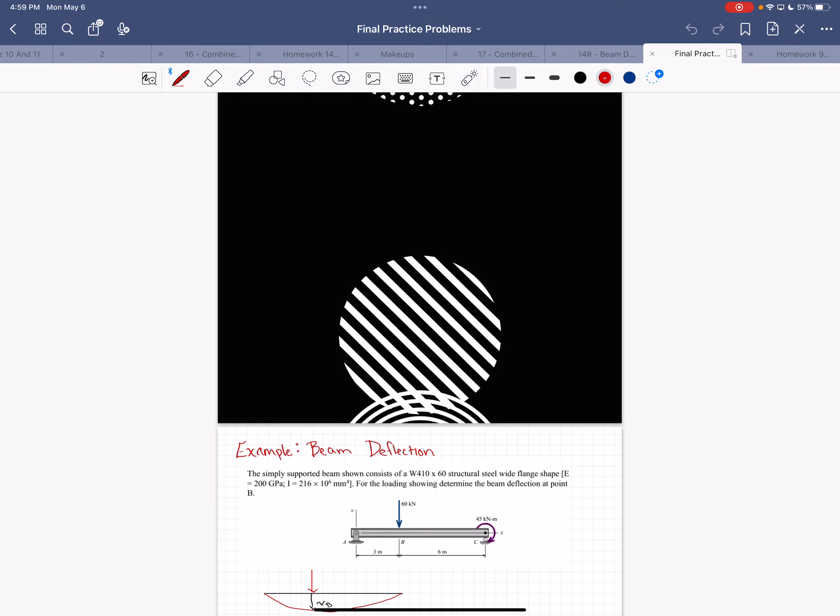Do you guys want to do a beam deflection or indeterminate problem? Do you think we should? I think we should do one of them, whatever one you really want that we should do. I kind of feel like we should do this one, whatever looks exactly like the questions on the test, the most similar to the test.

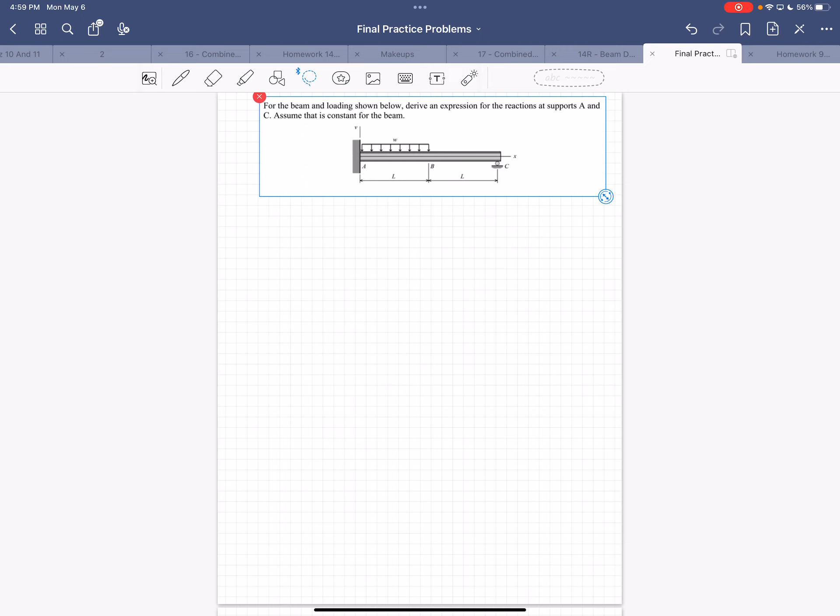We'll do this. Okay, I brought tables, do you guys want tables? Yeah, okay. I printed out so many, look at this stack of tables. So you have to return them tonight. Feel free to come get tables and we'll do this problem. Grab one, we can all share it, we can all point and be friendly.

You want tables? There's both styles, yeah. You can spread them out a different way if you want. Cool. You took it too? Yeah. You just took it to get a better grade, you're not going to be... probably not. Could you, if I get 100%? Maybe, I might, there's two different kinds. Sometimes one is better and sometimes the other one's better.

A 90 exactly, oh yeah. Oh there, I see, that's one style, and the other style, this one's just one page. The other style is more pages. Alright, nice.

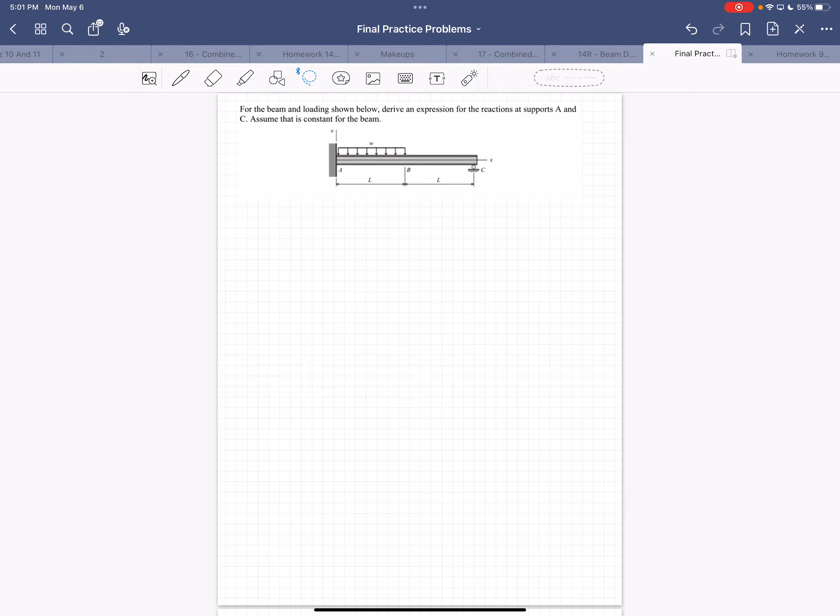At this rate, we're definitely here until 7. Alright, okay, ready?

How many reactions does this beam have? I am, thank you so much for reminding me, I am recording, and my microphone was off but I turned it on. So hopefully all is good. Okay, so how many reactions?

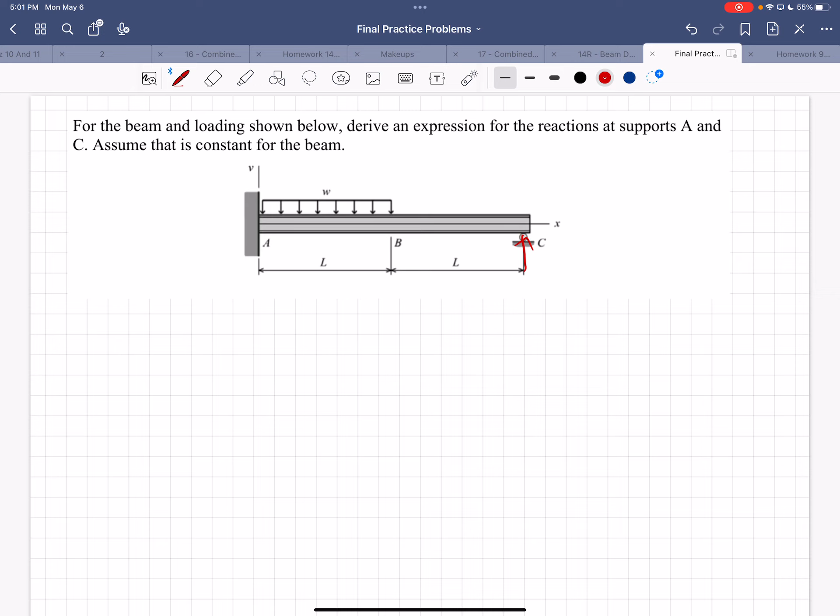4. Technically 4, 3. How many equations do we have? 3. So it's indeterminate, right? Ultimately we have CY, we have AY, we have a moment at A, and then we could have AX, and we would only have sum of the forces in the y, sum of the forces in the x, and sum of the moments about one point. 3 equations, so it's indeterminate to the first degree, right?

So what do I do? Yeah, get rid of one of the supports. Nice, and get rid of one that makes it easy. So let's pretend this was simply supported, just for a minute, this is a simply supported beam with a support right there. Get rid of that support, right? Because if you get rid of that support, then it's just a simply supported beam, right?

So many people, we're doing an indeterminate problem. There's tables if you want tables. Okay, but it's not really that, but I just recommend you do that if you were given that problem.

For this one, what is the go-to support to remove? C, yes. You could technically remove the moment at A, but I think that's harder. So you could remove the moment and turn it simply supported, but I think it's better to remove C. So then we're going to have two systems, right? So we remove the redundant support.

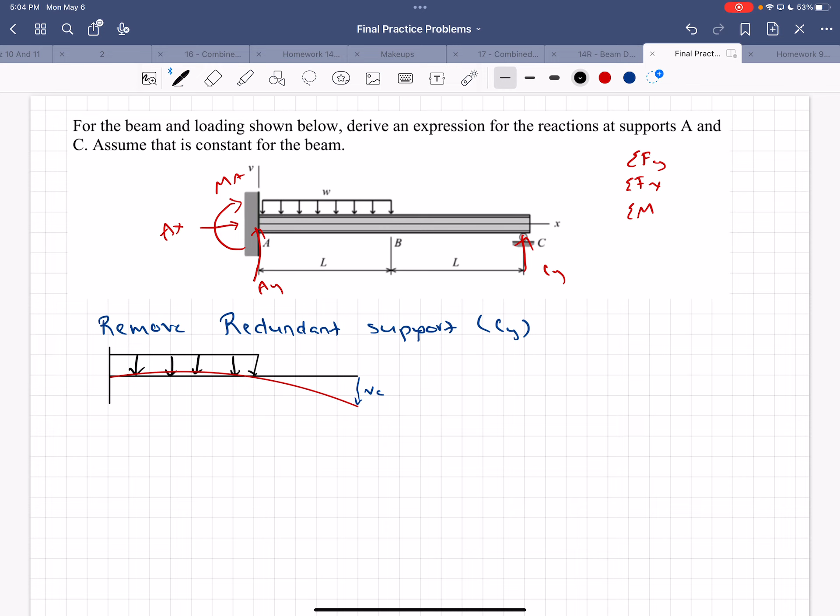So then the next thing you do is you draw another picture of what kind of beam is this? What do we call this beam? It's a cantilevered beam. That's just fun fact. So we draw another picture of a cantilever beam.

Do I put that distributed load on this picture? No. What's the only thing I put on this picture? CY, right? And it's going to be a point load where we removed the support, right? So CY will go up.

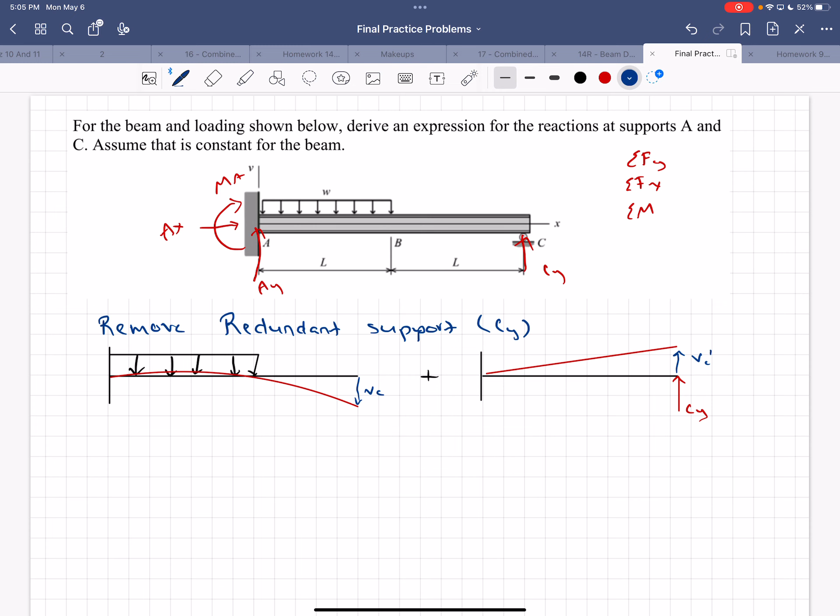So then how would this beam deflect? It would go up, right? Well, it would be curved, but whatever. So then this would be VC prime. But is there actually deflection at C? No. So we add VC plus VC prime equals 0, okay?

So if you do that much, you'll get a lot of points. But the next thing you have to do is go to the tables. And for this problem, neither table is superior. They're both equally good, so you can just pick whichever one you want. Anyway, sometimes they're better, but we're not going to get into that.

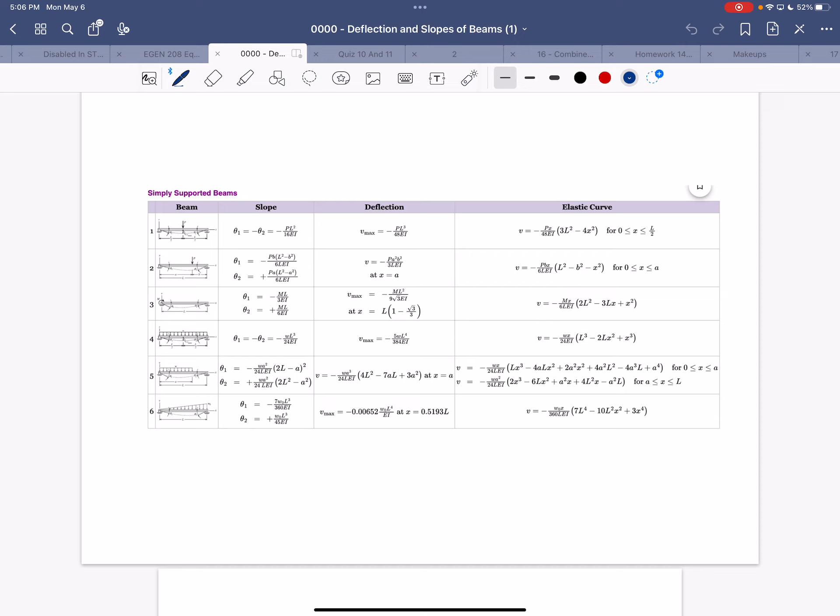Okay, so go to the table. What tables do you guys like? I have tables. Do you like the 2-page tables? 2-page tables? All right, do they... Let me see. I'm going to see if it's perfect. Yeah, I'll go with that. Nope, I won't go with that.

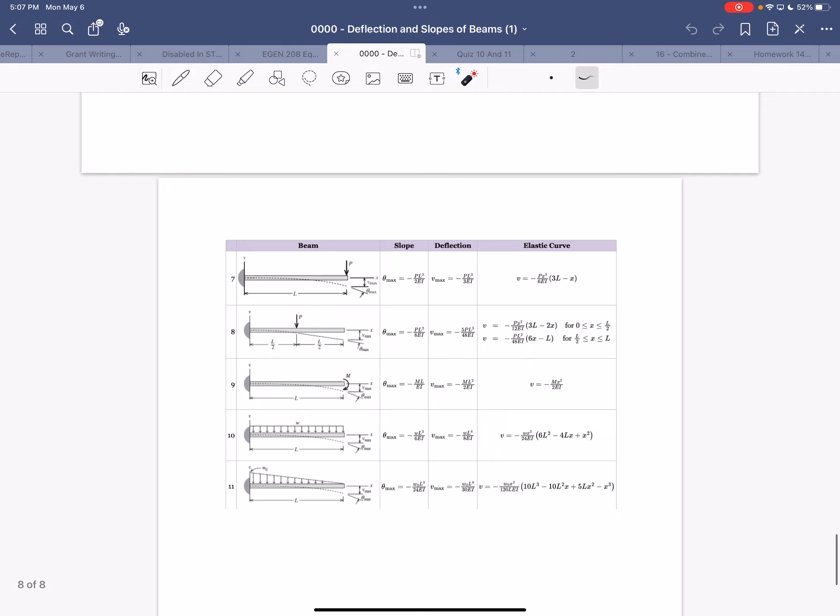So grab both and, I don't know. Does that make sense? So we don't want to do that because we would have to calculate the slope, everything. I'm lazy, and I know these tables really well, so I'm going to do this. All right, so because this table, see how this one has a distributed load over part of the beam. Cool? That's why we're going with this one.

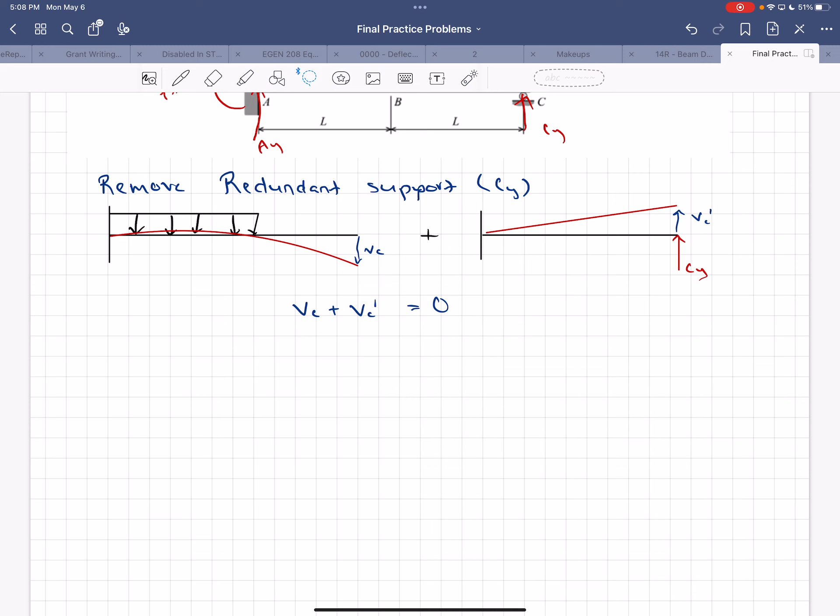But it's not always the better choice. For here it is. So, all right, there's just way too many things open. Okay, this is what we're doing. Okay, so we're gonna put that here. Okay, does everybody have that table?

So, this is something pointed out. So, we're lucky, right? Like our picture matches this picture exactly, right? However, if it didn't, you can flip things around and stuff like that, but that just comes with practice. So for this one, we're lucky, but you have to watch that and watch these rules and stuff. Then there's the rules, so you do have to pay attention.

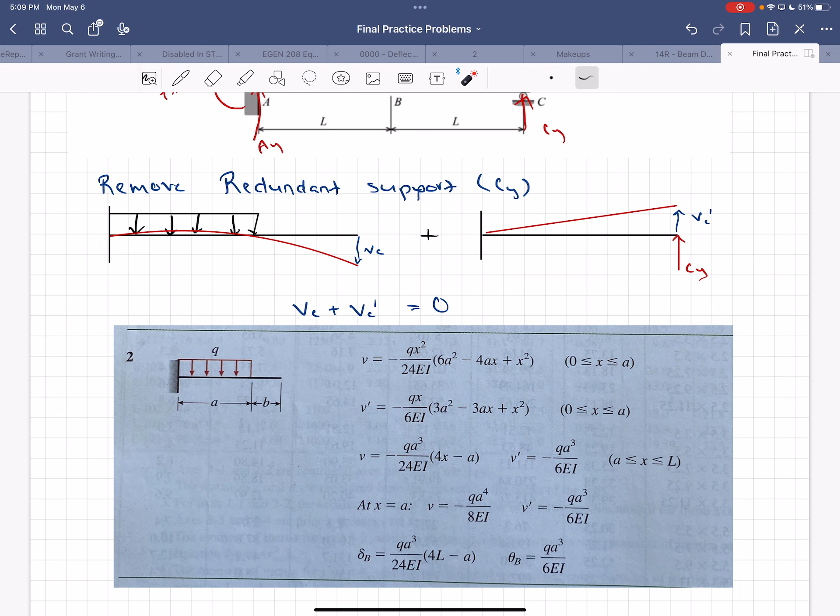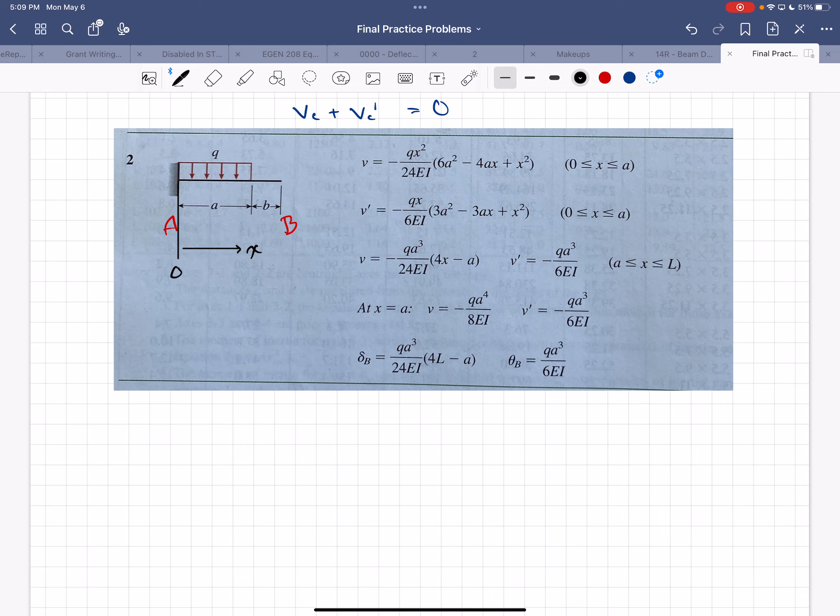It's not just like grab and go. Okay, but if you pick a table, okay, so where are we calculating the deflection? At the, yeah, way at the end of the beam, right? So technically they call this big A and they call this big B. Okay, so what would our X equal if X starts here? Remember, X always is 0 at A. It's 0 here, and X gets bigger as you go across, okay? But you could technically flip that around. So what would our X equal? L. L, right. Good job.

Perfect. So, can we use this equation? No, because that only works for X is less than A. Can we use this equation? That's slope. Remember, V primed equals slope. So you definitely don't want to use that equation. Can we use this equation right here? Yes. Can you go over why X equals L? Yes, so X is the place where we're taking the deflection. It cannot be stressed enough.

X is where we are calculating deflection. Does that make sense? We're calculating it all the way at the end. So X starts here at 0 and it's L over here.

Good question. Okay, so we could use this equation, but I guess it's the same, it's equally easy, right? So delta B is technically also the deflection, but same thing. We're actually going to use this one so we can practice what to do. Why wouldn't we use the equation right below it? Right below it, that's when X equals A. So that would be finding the deflection right here, and we don't care what the deflection is right there. Does that make sense? Yeah. So it's reading all these little details.

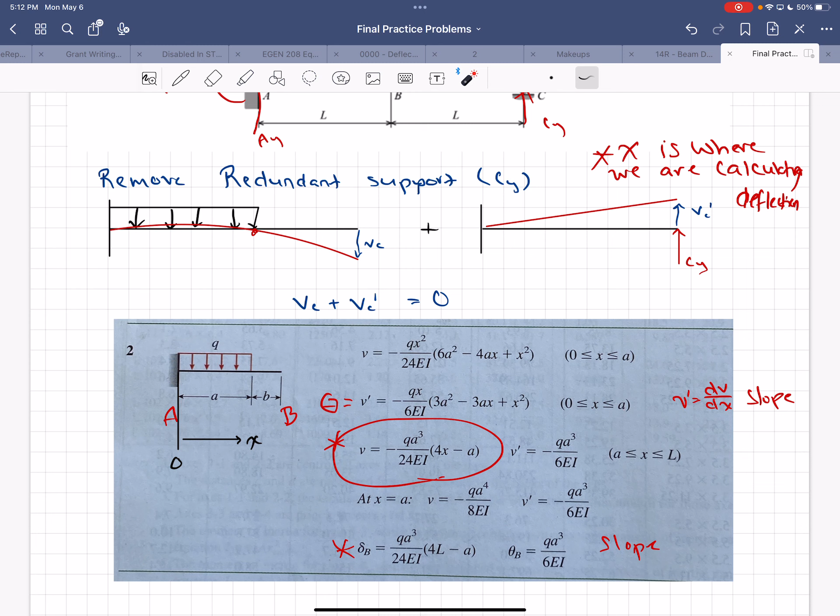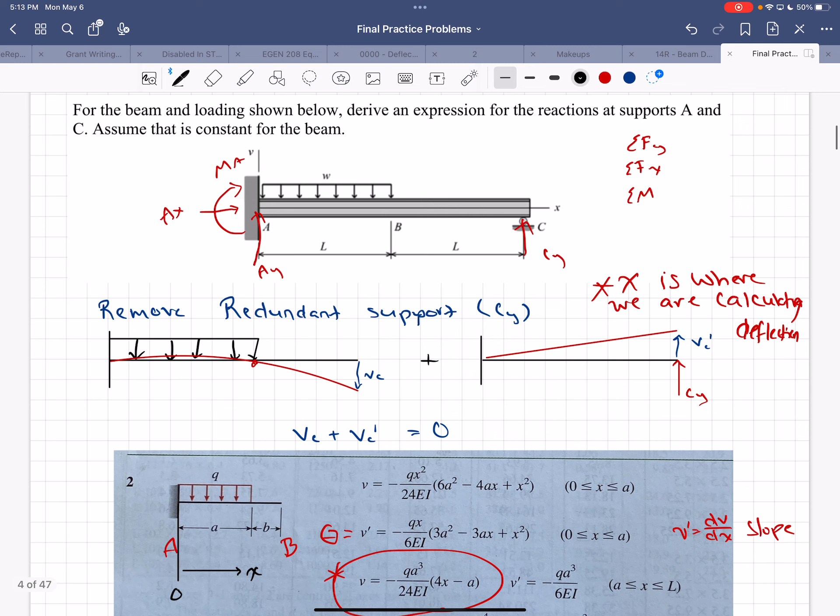Good questions. All right, the thing I recommend you do is write what all the variables equal. So Q equals what? W. Oh, you guys like this - it's no numbers, it's so much better, I think, someday. Oh, so much better. Q equals W. Okay, what is A equal to? L. Oh, you guys really love ones like this. A equals L. And X equals what? 2L.

Nice. Okay. So then V is going to equal negative W times L cubed, all over 24 EI, times 4 - use parentheses here - times 2L. Especially if it was squared, then remember the 2 is also squared. This one's not squared, but that's a thing, minus A, which is L. I can't stress enough, write this stuff down. You'll get points for it, and it'll just make your life a lot easier, because it's easy to mess up this stuff, but if I know you know what you're doing and you just messed up, you get more points, okay? So that's good to know.

All right, so now this is the part you guys don't like, simplifying it, I think, right? All of it. Yeah. WL cubed over 24 EI, times - that's 8L minus L, so 7L. So then it's just 7WL to the 4th divided by 24 EI. Did I get it right? Is that negative? Yep, it's negative. Good job. All right, I did get it right.

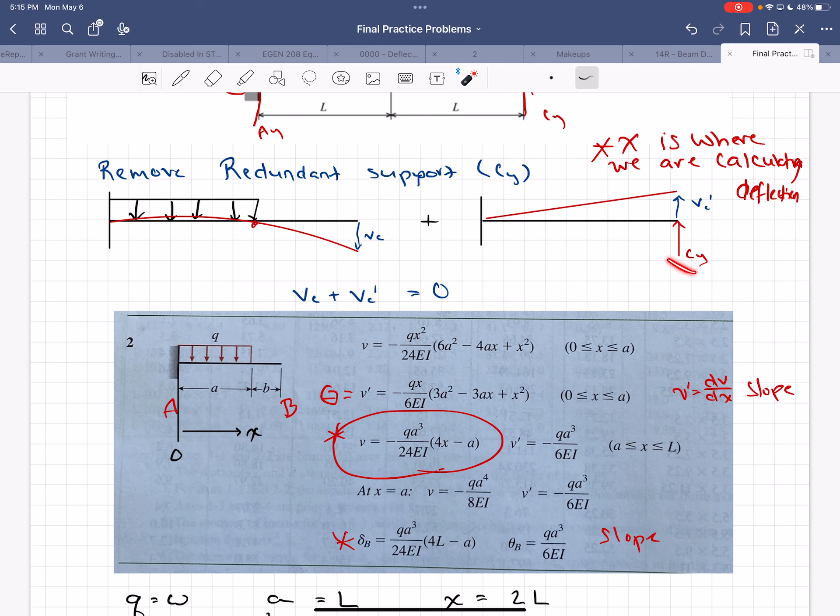Okay, so that's our V. Now we need our V prime, right? So that's from the point load, okay? No load on there except for the point load. All right, so we go shopping for equations again.

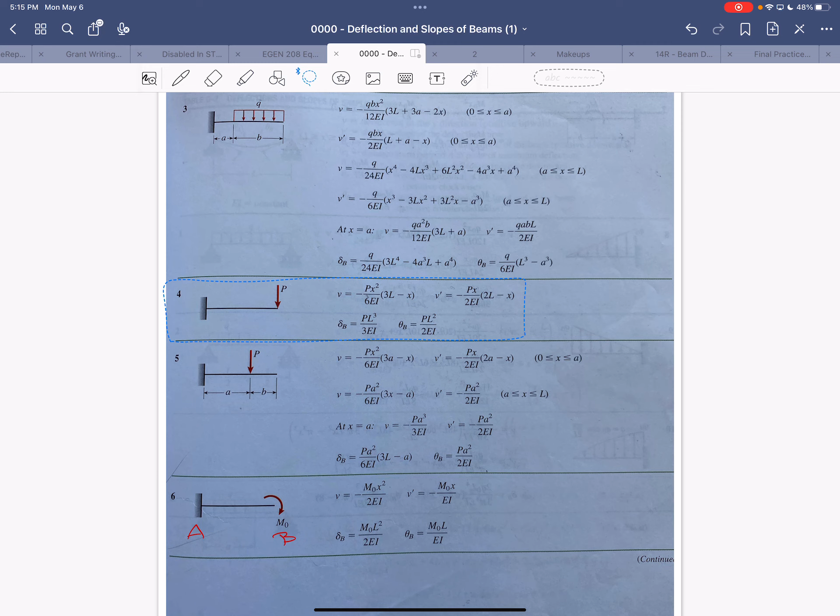All right, did you find it? For CY. Yeah. Okay. So then we have this. Okay.

So here we have two options. You guys see the two options? Which one? V? There's an easier option. Okay, but V is good, so you can definitely go with V. If you go with V, what's X going to equal? 2L, and then that would be squared. What's L going to equal? It's going to equal 2L. X is going to equal 2L. Remember what I said this one means?

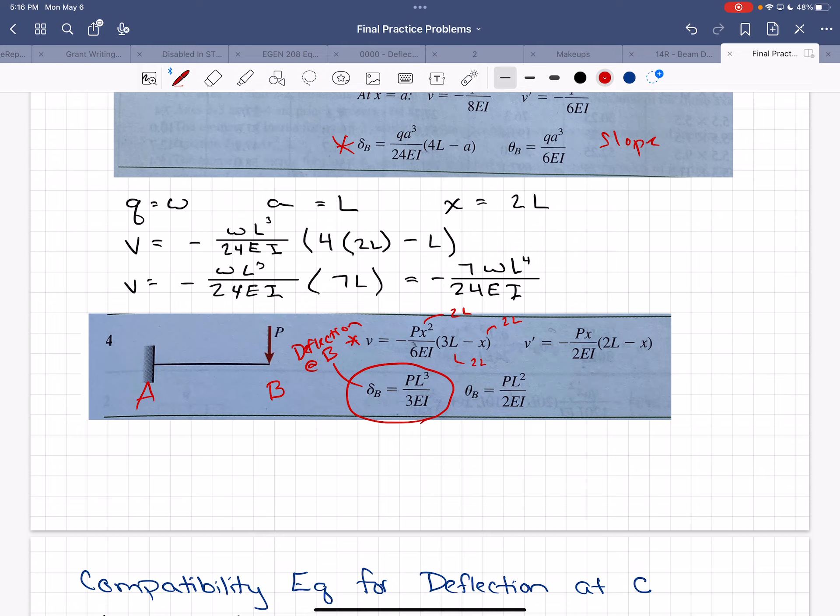So remember, yeah, they always call this A and they call this B. So this is the deflection at B. Is that where we want our deflection? Yeah. Yes, if you were to use that, just the B equation, that'd be totally fine. Would you just not use the negative? Right. Yep, we're going to make it positive because we know it's going to go up. Good job. Okay, does everyone see why? But you wouldn't be wrong if you used this one. You can totally do that, it's just a lot more work. Do you want me to do that? Or, okay, good - I really didn't want to do that.

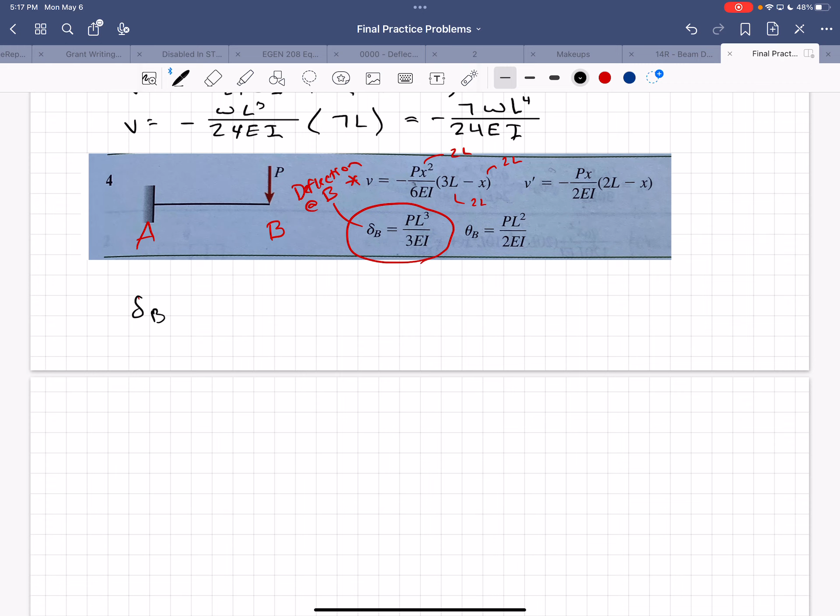Okay, thank God. All right, so this one's going to be delta B, but it makes sense why I can use that, right? Cool. Okay, that's the key - if we were calculating the deflection anywhere else, we couldn't use it. Okay, delta B equals P equals what?

P equals CY and L equals 2L, my favorite. So then we plug that in. We have 2L cubed over 3EI. So that equals 8 times CY times L cubed over 3EI.

Okay, so now what do I do? You can add them, set them equal to each other, and solve, right?

So, I see what's going on as I'm writing. This is updating. It's very confusing. Okay, let's do it the proper way.

We have negative 7 WL to the 4th divided by 24 EI plus 8 CYL cubed all over 3 EI equals 0.

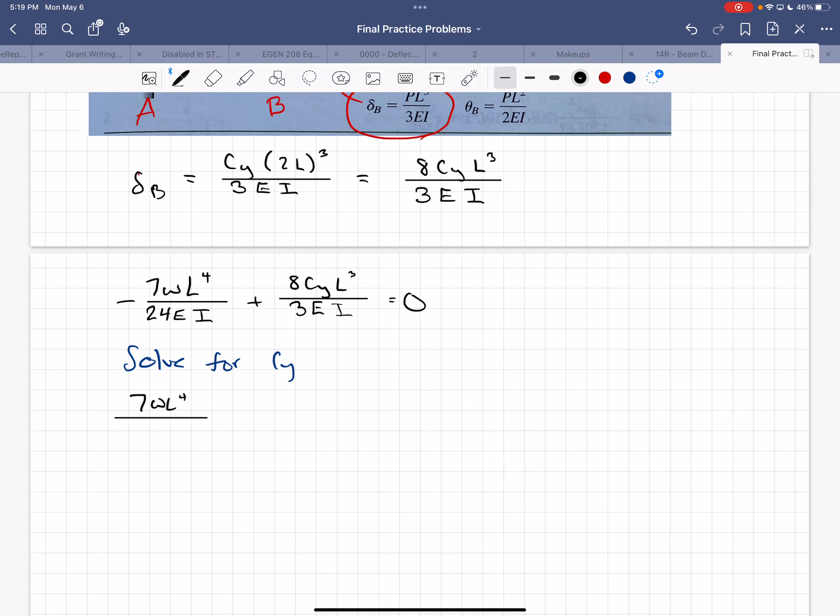And we solve for CY. So you end up with 7 WL to the 4th all over 24 EI equals 8 CYL cubed all over 3 EI.

Okay, how comfortable are you with then? So then you have EIs in both denominators, right? So you can get rid of those. Because you would multiply this one by EI.

I'll do this in colors. So you would have EI times EI. Is that better? Demonstrating? Okay. Then you would bring in a different color, you would divide by L cubed, and you would divide by L cubed. So now that goes away, and that goes away, and this goes away.

Yeah, you can do it however you want. And then the 4 turns into just a 1. And then you're left with CY equals 7 WL over 24 times 3 over 8.

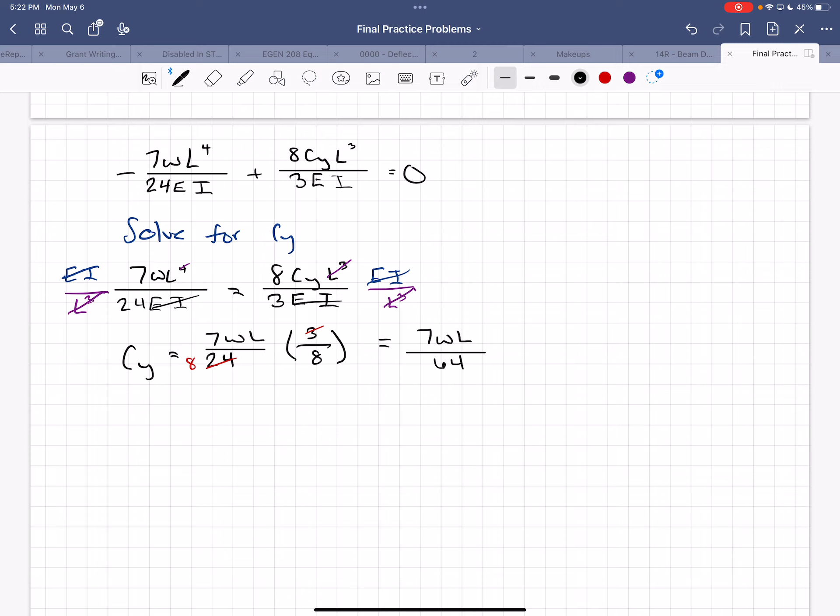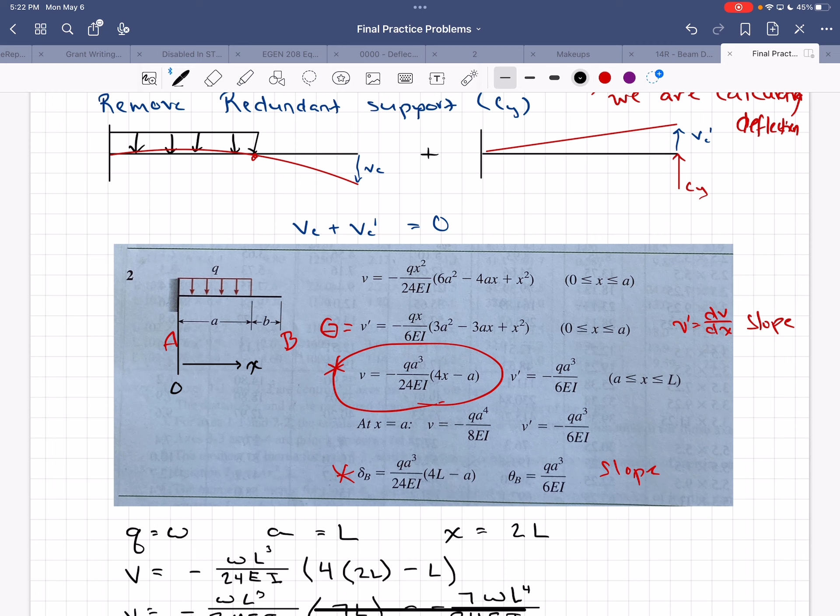But it'll be okay. 7.5 points, you got this. Use the tables, 7.5 points for the deflection problem. So that's like more than a quiz? 10%? Less than a quiz. A quiz is 10 points.

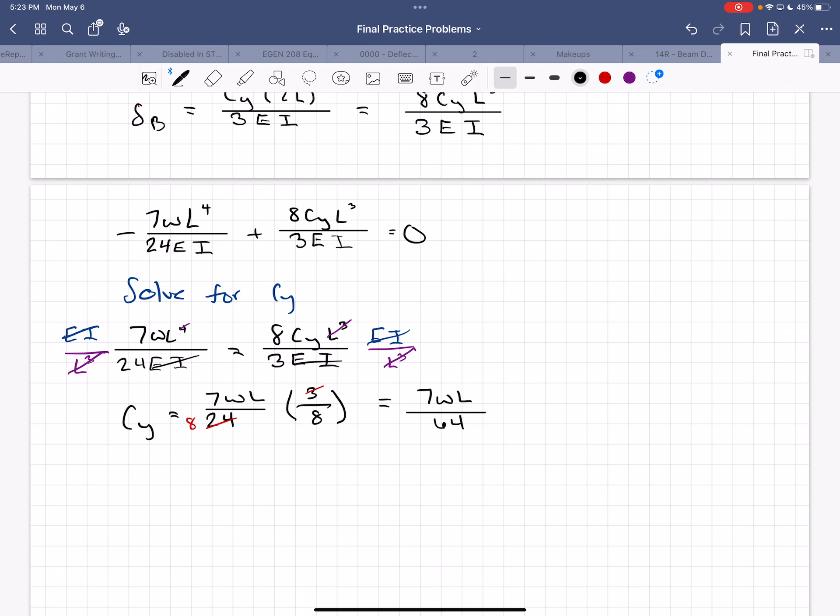Okay, yeah. How many questions? So this is for 7.5 points. How much is pressure worth? Another 7.5 points. So I don't have any pressure problems on here, but don't forget to study pressure, okay?

And mainly that's like knowing your way around your equation sheet, right? It's just going various up and down. And does everyone have an equation sheet? I brought extra. While you're studying for this, I have extra, so either get them now or on your way out, and I'll try to print more if you take them all.

But use the equation sheet while you're studying, and put stars on when we get to it. The things, they're right there. Put a star, okay, so don't forget about pressure, right? But that's like going up and down the pressure equation section. You have 3 homework problems. We did 3 examples in class, so you've got plenty of examples.

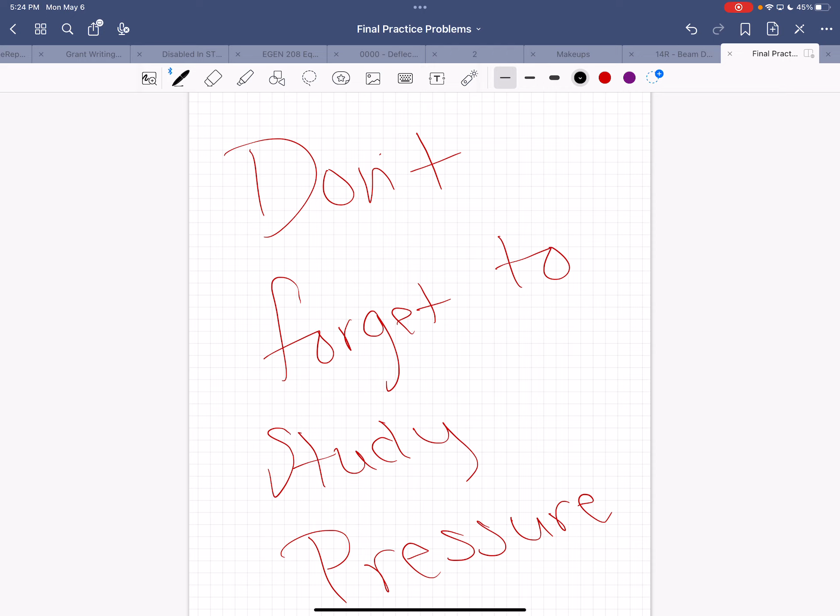So there's a beam problem that's 7.5. Some pressure problems at 7.5. So there's 2 7.5 point questions, a deflection or indeterminate problem, and a pressure problem, both worth 7.5.

Then there's a problem broken down into short answer questions. So you don't have to do a whole beam deflection problem, but you have to know how you would do parts of a beam deflection problem. That's worth 10 points. It's short, with a couple true/false questions and one Wiley quiz-style question. So that's 10 points.

Is that it? Nope, so that's 25, and then the last 25... 50 points total, yeah. I was confused. Then the last 20, I wrote it in lots of places. So then the last 25 points are general combined loading.

Okay, you got this. Do you want to do this problem or do you want to do general combined loading? Both. Okay, that's fine. So we'll do this problem.

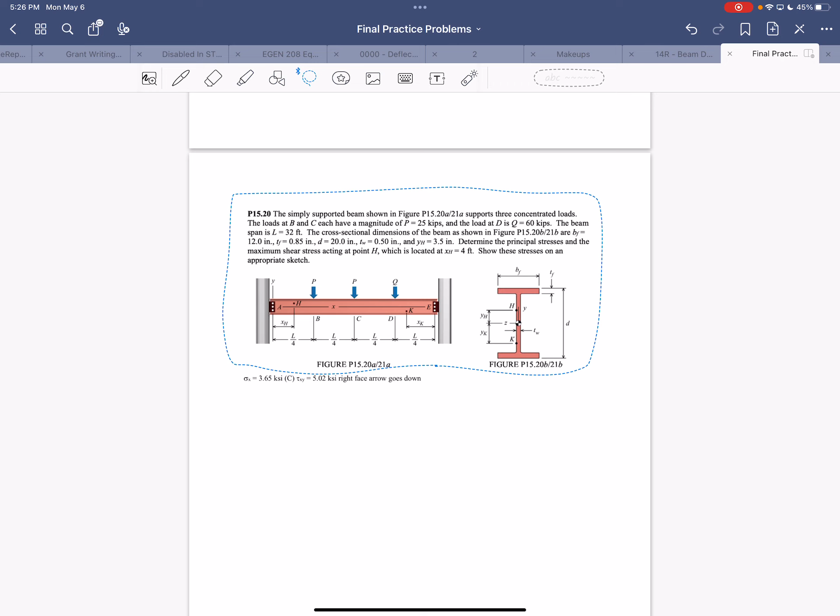That's not gonna work. Okay. All right. Oh, I guess I could have done that. Okay.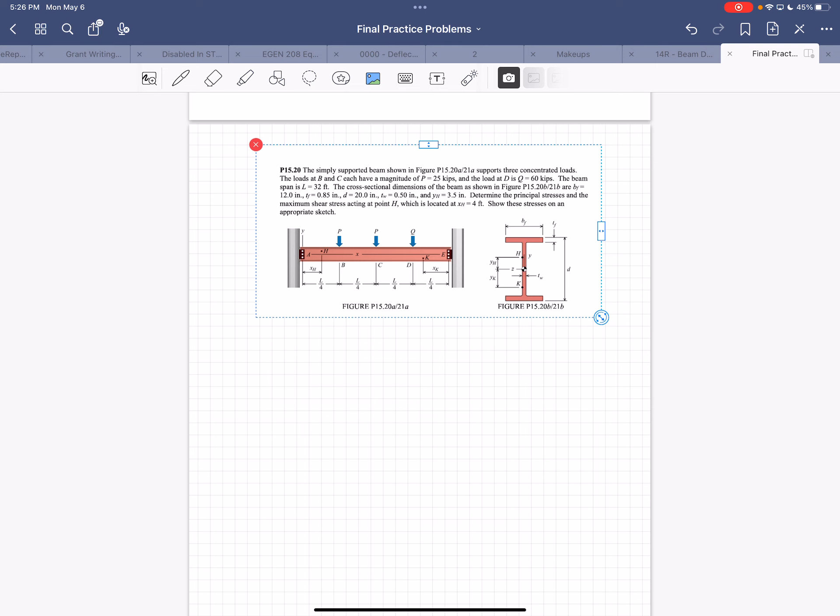Okay, so we're only gonna do H or K. How does that sound? But is H in tension or compression? I don't have my beam here. Compression, right?

So you have these loads, they're symmetrical, they're pushing down on this beam. This beam would smile, right? It'd be a smiling beam, a happy beam. So that means compression on the top and tension on the bottom, right?

So is K in tension or compression? Tension. Nice. Okay. I guess it's not symmetrical.

P equals 25 kips. That means this equals 25 kips. Q equals 60 kips. All right. And then we have a reaction at AY and a reaction at EY.

Do you guys feel comfortable solving for reactions? Cool, good. So you would sum the moments, you get AY, you'd sum the forces in the Y, you get EY.

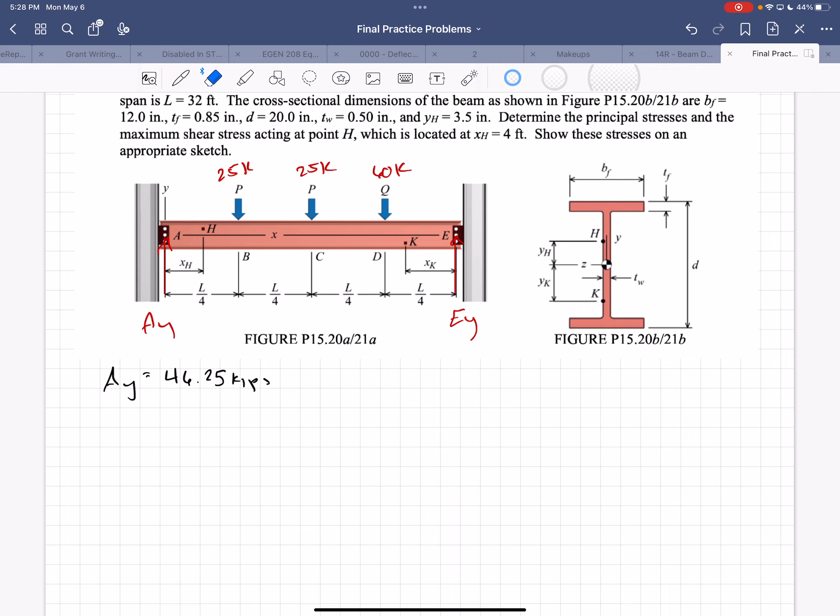Cutting it, right? So if we cut it, this is an important thing here: we're going to draw a free body diagram. And in this free body diagram, right on the edge, is H, okay?

And we have our reaction here of 46.25 kips. And then following the sign convention, right? So there's always the sign convention. This is what we call positive beam sign convention, where if we're looking at the right side, the shear is negative and the moment is positive.

And then remember on your homework, we also had an axial force, right? That was fun, it made a lot of you happy. And on the left side, we have V, M is negative, and we always draw the axial. But we don't have axial in this beam. Just to remind you, this is positive sign convention.

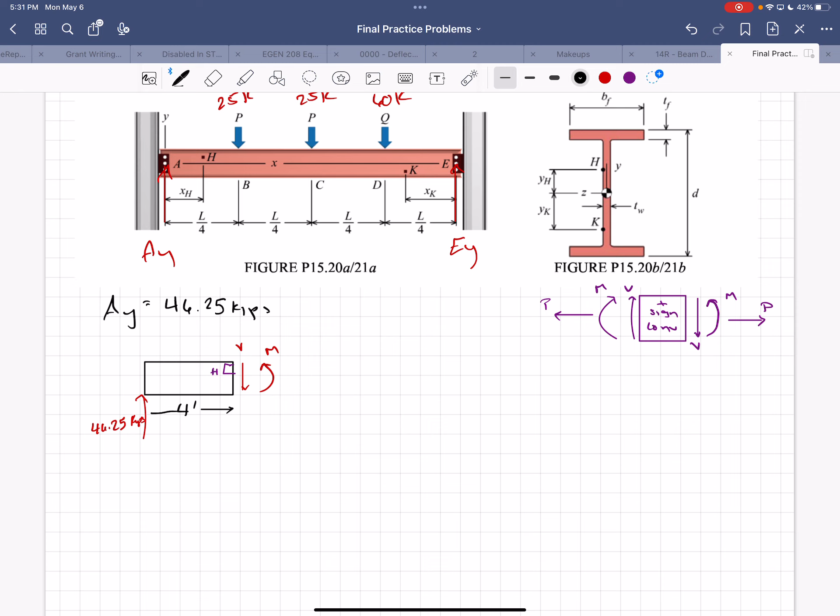Good question. And this distance is 4 feet, they told us that. So, technically, we didn't even read the problem.

We're not going to determine the principal stresses, because then we would have to do, what would we have to do to determine the principal stresses? Grind. We'd have to do Mohr's circle. So you don't have to do that.

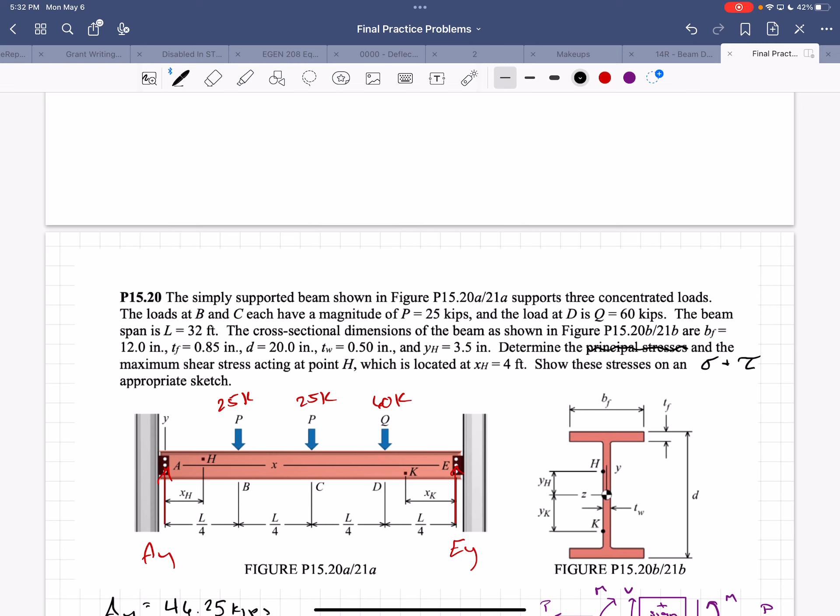We're just going to determine the normal and shear stresses at H. Is there going to be any Mohr's circle? No. No, that'd be a big curveball. All right, so we're gonna determine the normal and shear stresses.

All right, what are the equations for normal? What's the equation for beam bending? Sigma equals M*y over I. Nice.

No, what do you... how do you know when to use like the negative M*y over I? Anytime, so in beams, you can do it. So like here, you can do it. Don't do it for general combined loading because it's too hard to keep track. So the way it works is you can do it for beam bending because it's easy to tell if your moment is positive or negative, and it's easy to tell if your Y is above or below the neutral axis.

But with combined loading, there's so much going on that to keep track of whether each of those is positive or negative, it's just way better to look at it. So you can still put a negative sign there, but I think you're getting to the point where you can kind of see it. But if you can't see it, put the negative sign and follow all the rules. It's like a tool, but you have to know how to use the tool, and it doesn't work well for general combined loading. It doesn't work at all.

Okay, beam shear. What does that equal? It's not V over A. What is it? It's V times your favorite letter of the alphabet. V times big Q over I times the thickness, right?

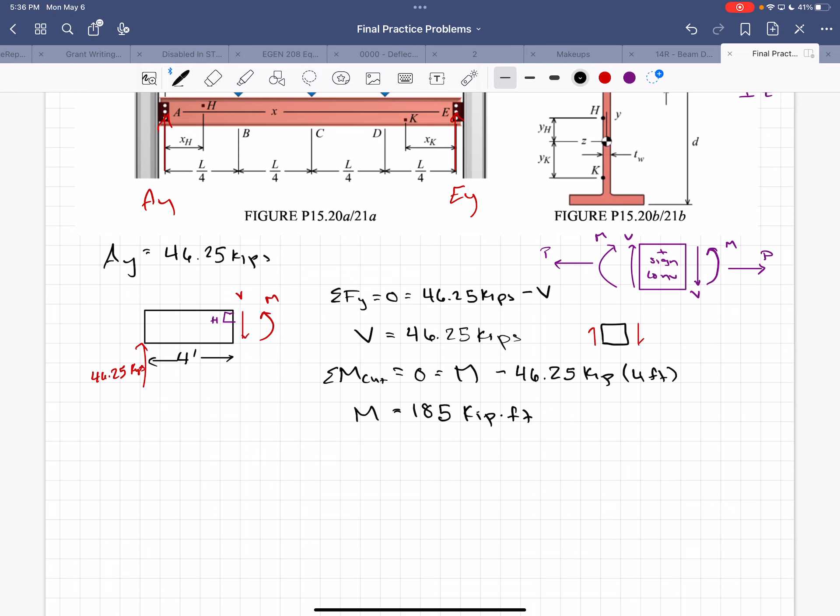Okay, then we're going to sum moments. I always sum them about the cut because that's just what I do. So then we have positive M. Remember, forces go away at the place you're summing moments, but moments don't go away ever in the moment equation, right? Okay, so we have M, and then 46.25 times 4, is that going to be positive or negative? Negative. Right-hand rule, summing about the cut, we'd have minus 46.25 kips times 4 feet. So the moment equals 185 kip feet.

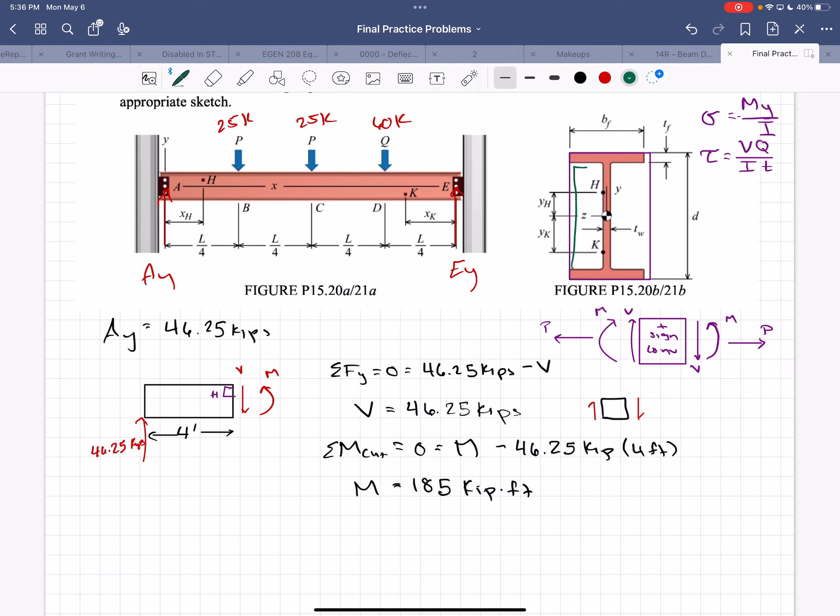Okay, then they didn't give us I, but because this is symmetric, there we go. Symmetric, we can do the purple area minus the green area, right? Okay, I'm not going to make you calculate I on the exam. Can I just write I? Is that okay? Yeah.

Okay, I'll do it. So this would be 12 times 20 cubed over 12, minus 12 minus 0.5, 20 minus 2 times 0.85, cubed, thanks for giving me, over 12. All right, 2,126.9 inches to the fourth.

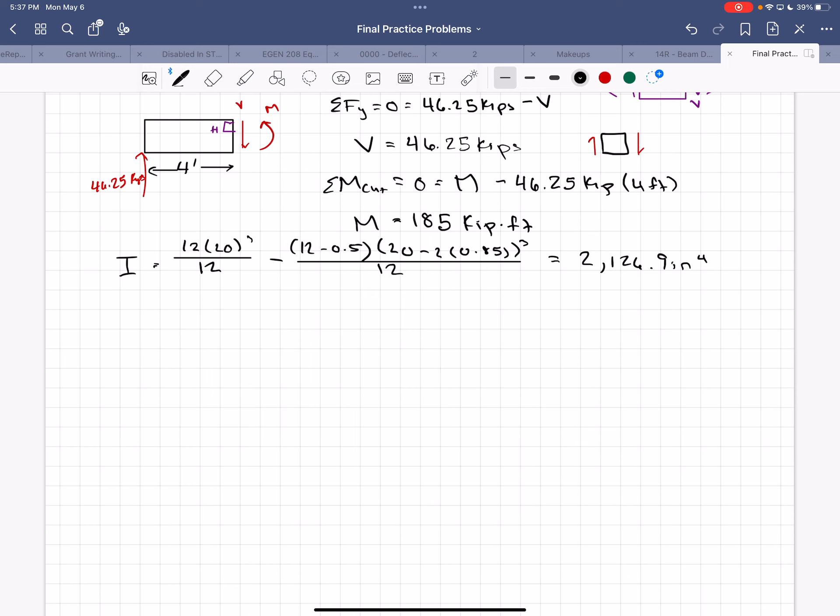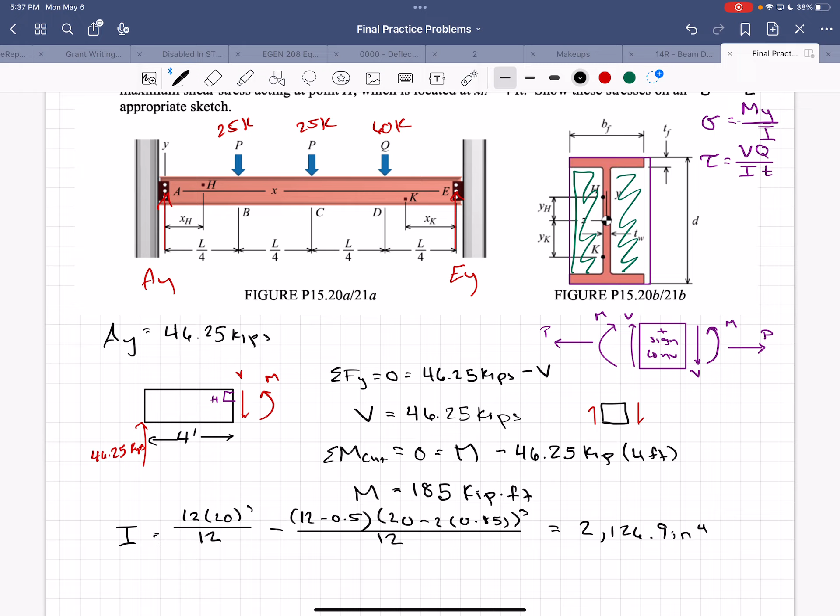Okay, so we can calculate something now, right? Which one can we calculate? Bending normal stress. So bending normal stress is sigma equals My over I.

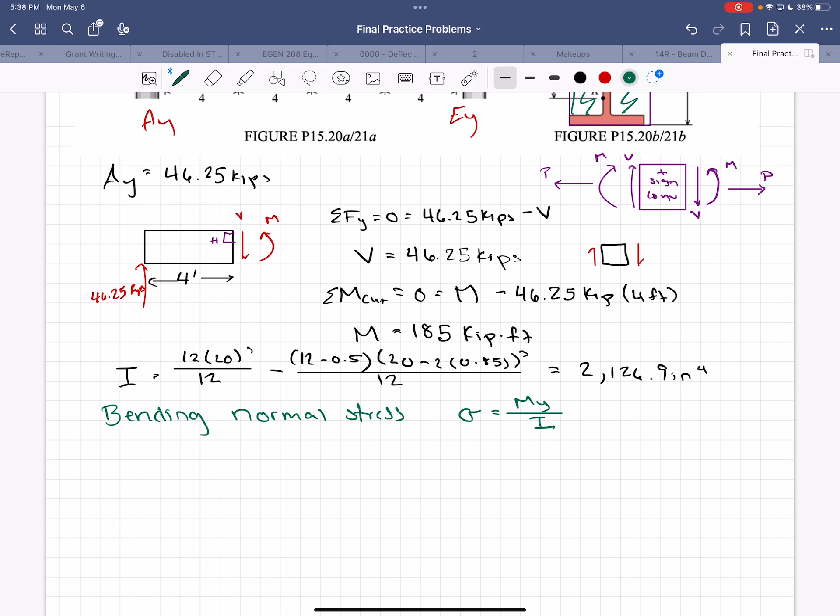All right, we know M, we know I. What's Y? Is the central... Okay, yeah, so it's the distance from the centroid to the place where we're calculating. So this is Y in My over I. Okay, so Y at H is 3.5 inches. So Y equals 3.5 inches. Make sure you know what Y is.

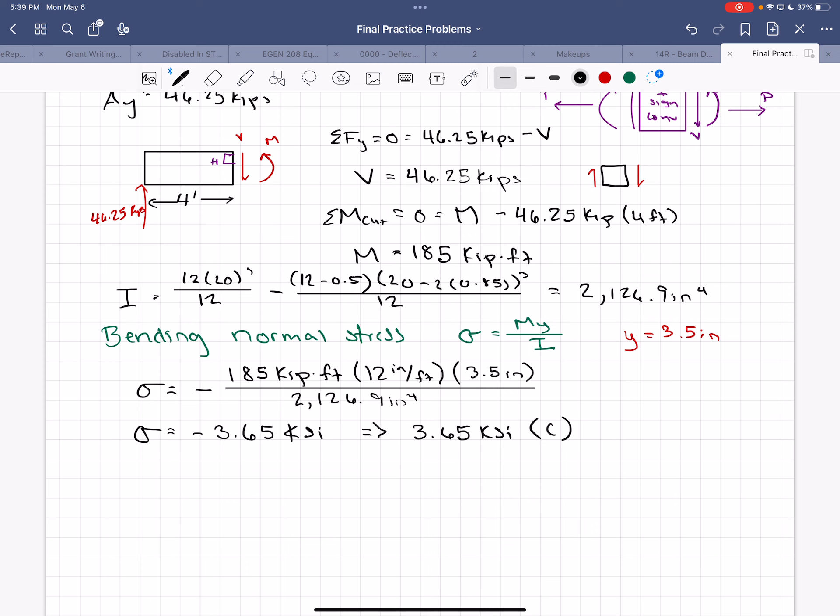So sigma equals, if we use the negative sign, our moment was positive. So we have 185 kip feet. Everything else is in inches, so times 12 inches per foot, times Y is 3.5 inches, all divided by I, is 2,126.9 inches to the fourth. So sigma equals negative 3.65 KSI. What does the negative mean? It's in compression. 3.65 KSI in compression. All right, now for the exciting part. Let's go Q.

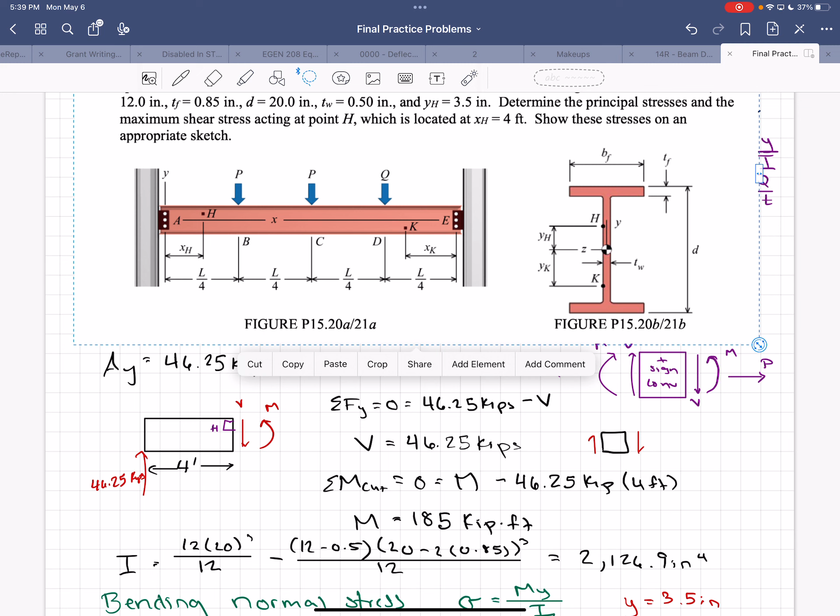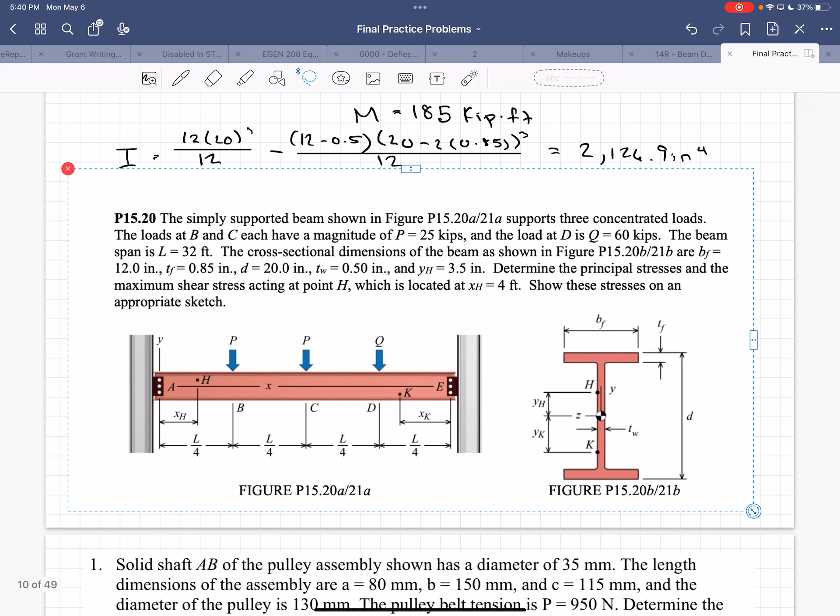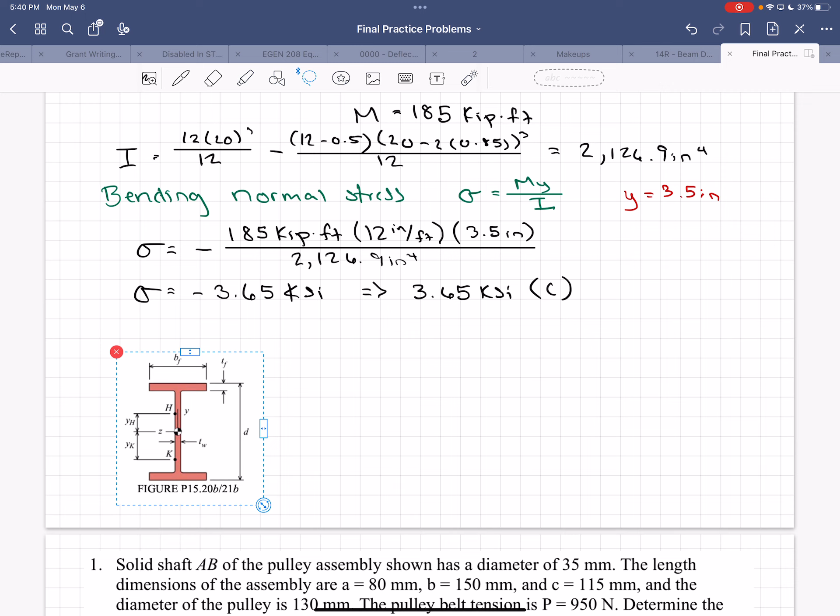All right, so now we have, this is tau equals V times Q over IT, and Q equals the sum of the Y-bar-i's times the A-i's. And remember, Yi is similar to D in the parallel axis theorem. Does that help? It's very different than the Y. Theorem's a hard word to spell. Glad you can't read it, because I don't know if that's how you spell it. All right, so Yi in this equation is very different than Y in the last equation, right?

Okay, so what do I do first? I'm calculating the shear stress at H. Draw a line, yes, I draw a line through H, right? I draw a line through H. So this is where I am calculating the shear stress. And then this black line is the neutral axis. Okay, then I need two areas here, right? I need this top area, and I need this section of the web.

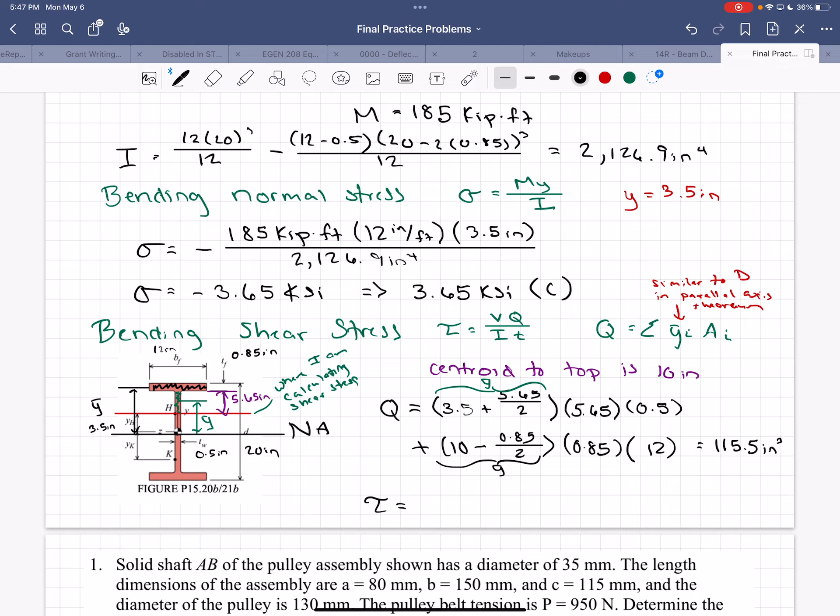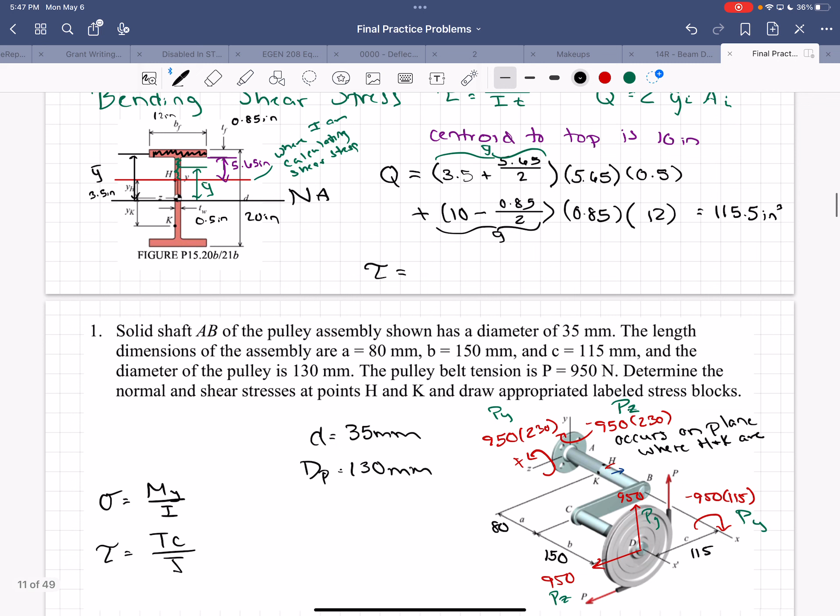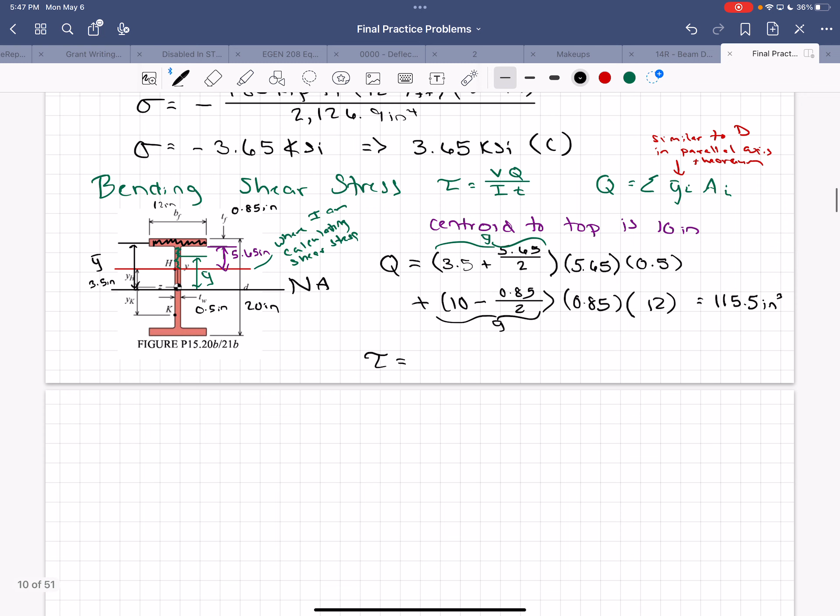0.5. Nice. So we get, and V is what we solved for here. So V is 46.25. Here, I'll move this up. Oh no, it wasn't where I wanted it. Okay, here we go. So V, forget it, we're not in our suite room where you guys can see everything.

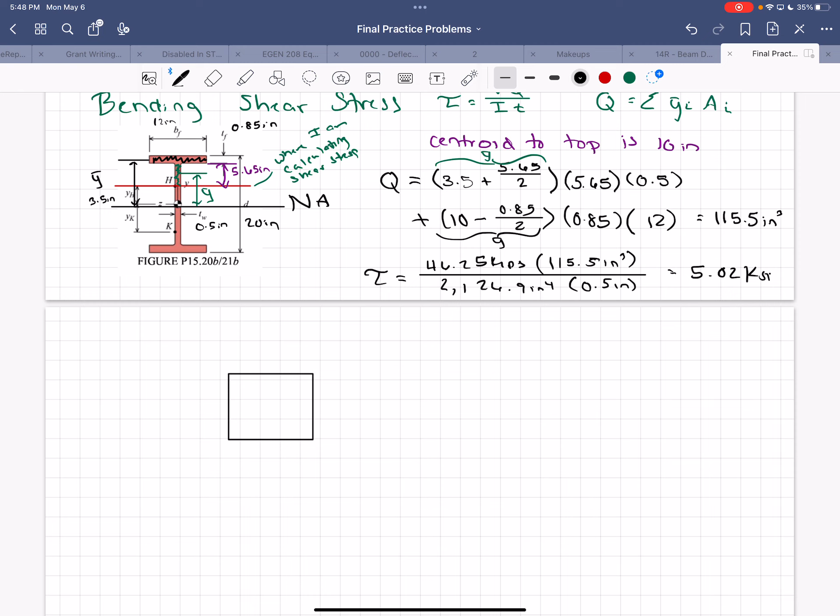V is 46.25 kips. Q is 115.5 inches cubed. I is 2,126.9 inches to the fourth, and T is 0.5 inches. 5.02 KSI. Then you have to draw the stress block. So B, no, because remember that it comes in on the stress block. So that's just magnitude. And then, yeah. Okay, so bending's normal stress.

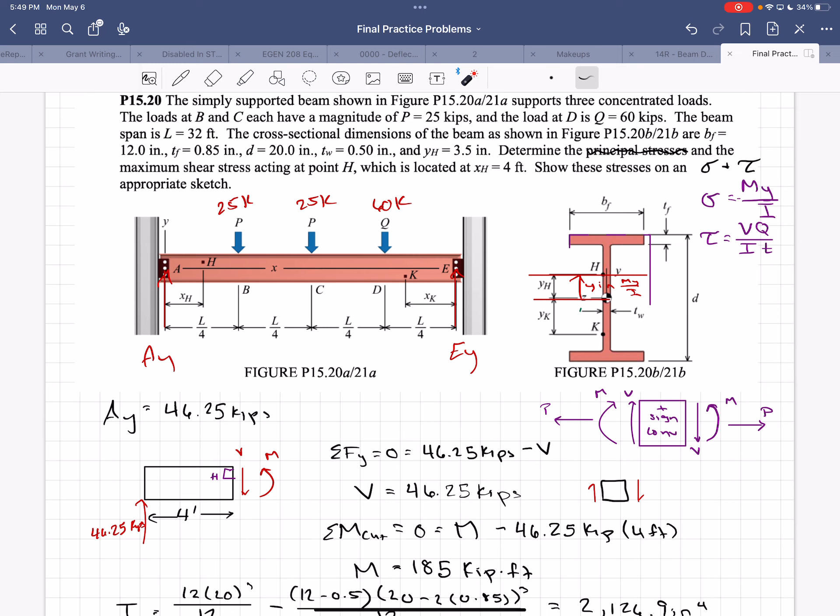Does it act along the length of the beam, or does it act up and down? Bending normal stress. There we go, good job. Along the length. So remember, if we drew this, we would have the normal stress. We'd have compression on the top, right? Is this ringing a bell? And then we'd have tension on the bottom. So the arrow is the stress acting on the longitudinal axis.

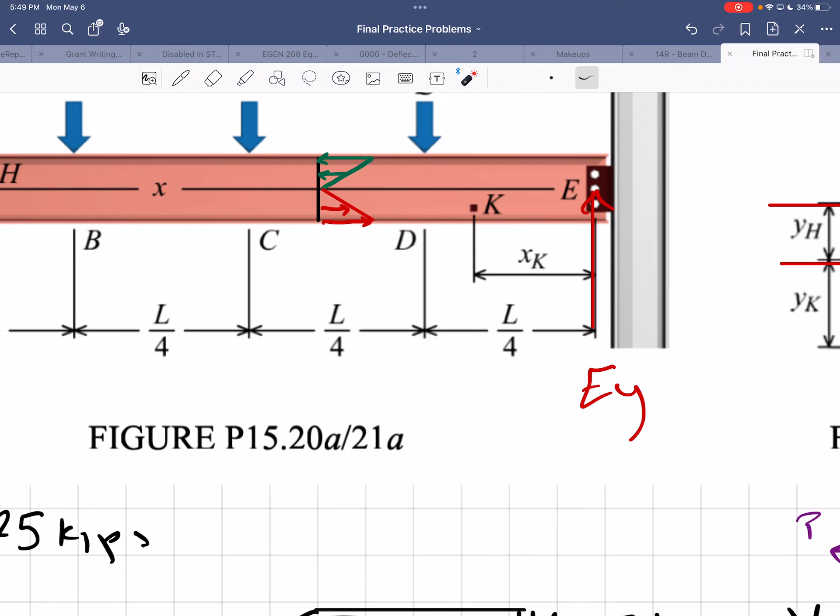Make sense? That's good, important facts. All right, so that means that our normal stress, we said it was in compression, is going to act here, right? Longitudinal axis. Nothing going on in the X and Y, or in the Y direction for normal stresses. And that equaled 3.65 KSI. That equaled our sigma.

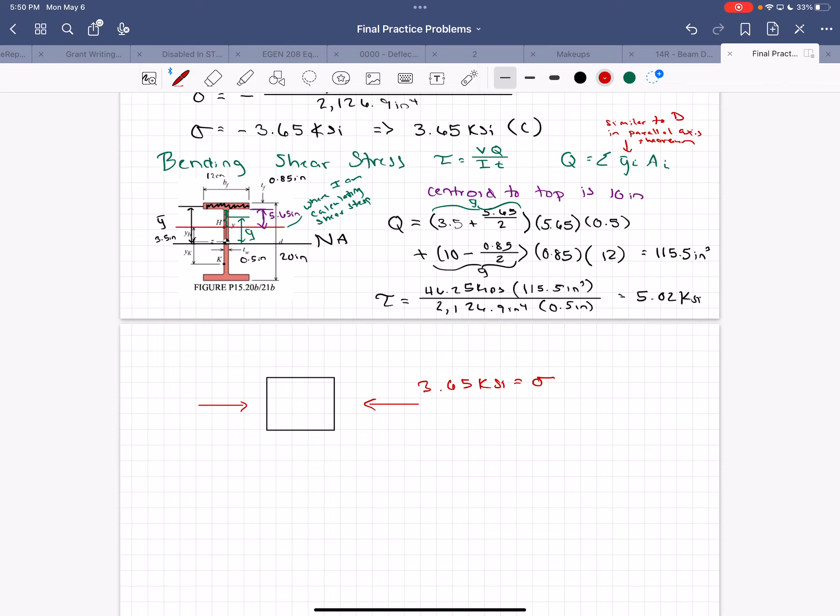Then our shear stress, remember we looked here, it'll be like that. So go down and up and match up the arrowheads and tails. And then you label it 5.02 KSI. And for beams it's less important, but for general loading, you definitely have to put your axes. Cool? So that's that, and that equals the shear stress.

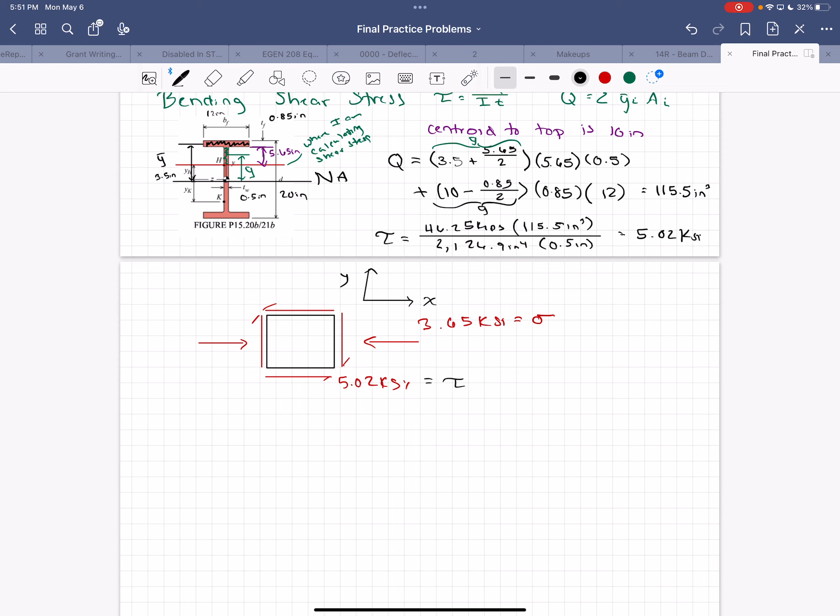All right, any questions about that? Beam bending, Q is the most annoying part, right? Y for My over I is centroid to where you're calculating the normal stress. Y in Q is centroid to the centroid of each area. Okay, and each area has its own Y. Okay, so then there's two problems.

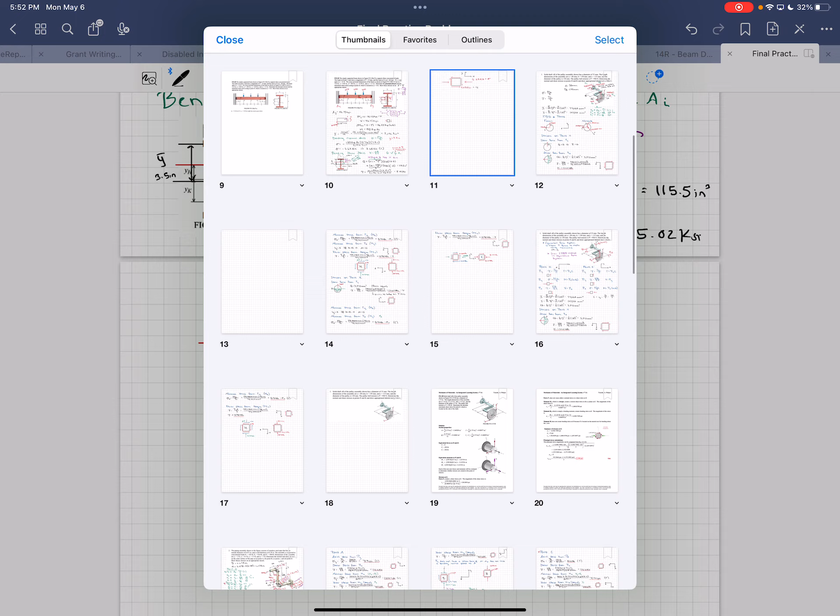There's this one, and then there's the other one. Which one's your favorite? Which one's most similar to the one on the exam? I don't know, they both have their things. There's this one, and there's... I'm not gonna do all. This one, I guess, the important thing is...

All of these are equivalent force systems. That's why we're moving forces around and things like that. You can move forces around because we're making moments, right?

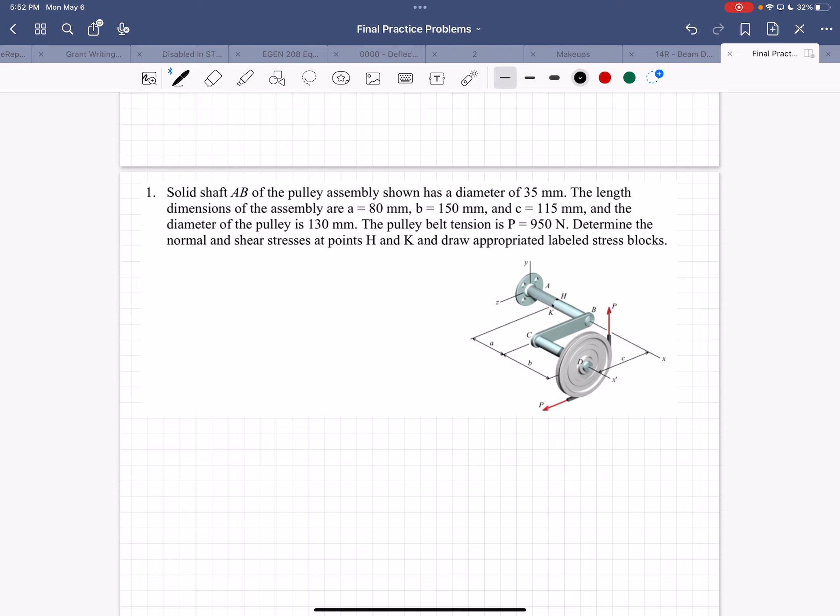So for this problem, has anyone tried this? No? Okay, this would be a good one for you guys to do on your own, but I'm gonna help you get started. All of these are equivalent force systems, but for this one, if you have this P going around the shaft this way, and you have this P going around the shaft this way, and you're taking a moment about the shaft, what's the moment going to be? The sum of the moments. Nice.

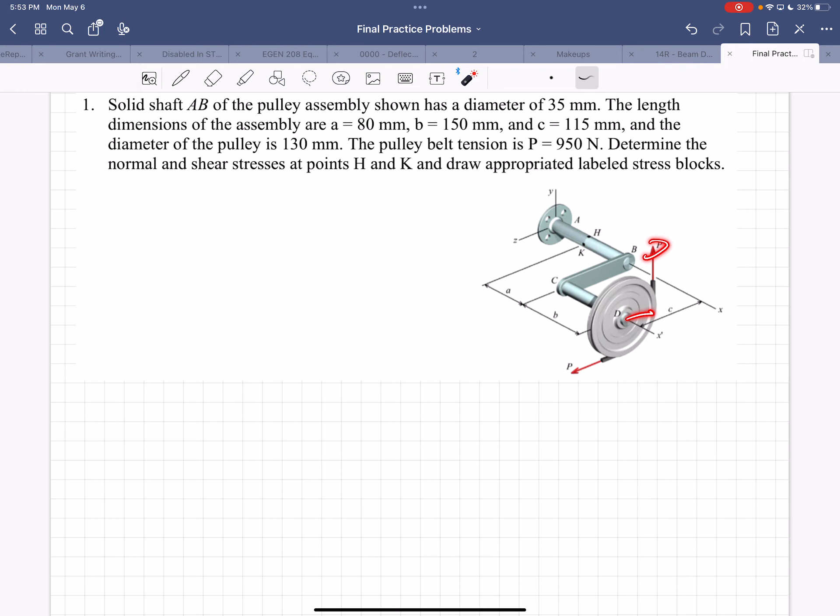So moment is a force times a distance, right? So this would be P times that distance. This one would be P times this distance.

Would this one be a positive moment or a negative moment? Positive. Would this one be a positive or negative moment? Negative. So if you summed those moments around the shaft, they're not actually going to twist the shaft, right? The sum of the moments is 0. But what they are going to do, remember, is put these forces on the shaft.

So you can do this. This is Py, and this is Pz. And then you can go about and do all your things. Okay?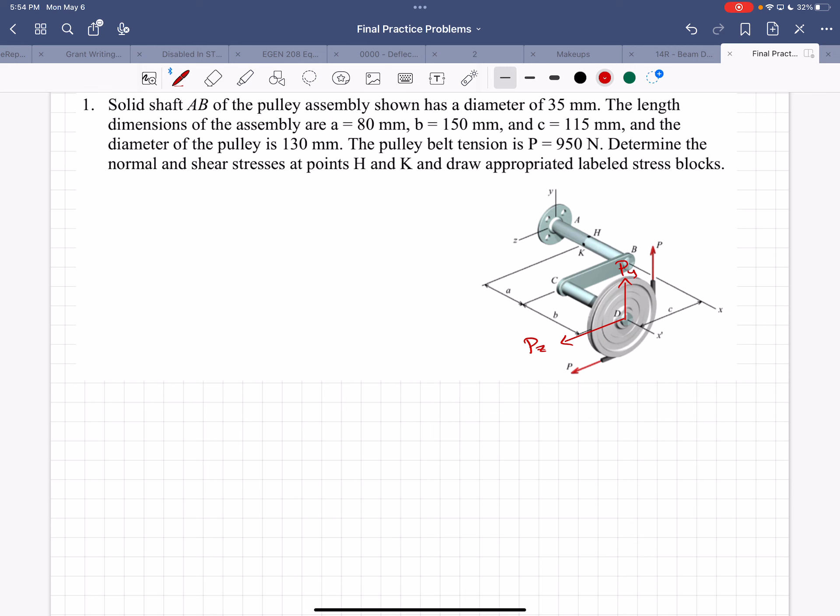So that's good. We'll do this other one, and then if you want, I'll come back to this one and at least go through what the things are. Sound good? Okay, so here we go. All right.

So we have this. There's so many ways to do this, and that's what's hard, because I keep trying to teach you guys a lot of ways, and in the process I confuse you. Like it works way better, like Zane, we're getting it with the dog bone. Gabe played with the dog bone today too, and it helped. But it's hard because each of you has to figure out your own way to do it, and I can try to teach all the ways, but teaching you all the ways confuses you because there's not a system.

So my plan for today is to do it my way to start out with, and then I can show you some other ways, but I'll be around tomorrow afternoon if you want more help. Ryan will be around, Andrew will be around, but it really just takes a lot of practice and seeing it. Today I spent so much time thinking about how I could make this any more clear, and possibly less clear, but hopefully we'll see.

So I think a good thing to do is start—like it says, oh my god, all the points. We're not going to do all of them. Okay, I'm going to go through all the points, but I'm not going to do all the calculations. How does that sound? Okay, I'm going to go through all the points, and I'm going to do it this way. Okay, so we're going to start.

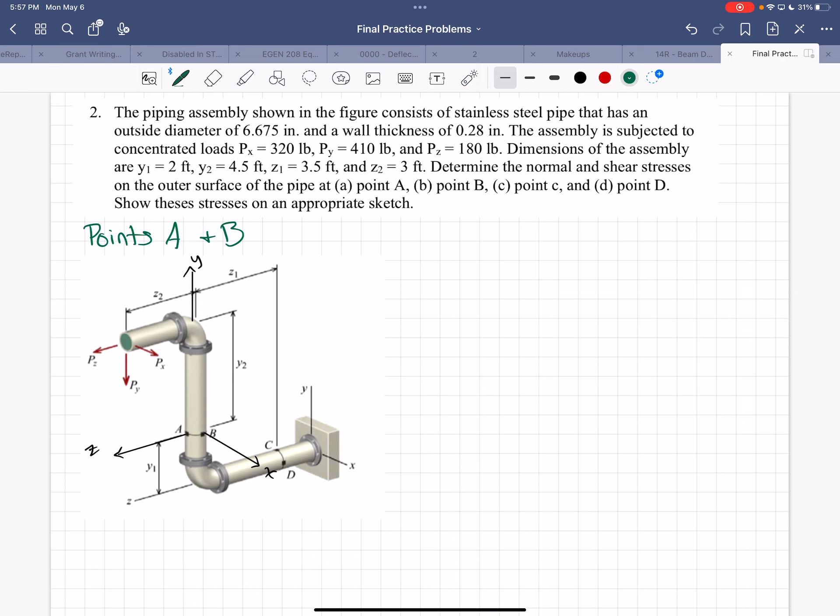You probably won't have to do A and B like this on the test, but for learning purposes, we're going to write point A and point B. We're going to go through each load and figure out what it does at point A and point B and try to get some relationships going for you guys, okay? But before we can move on to that, we have to draw the axes for point A and point B.

So when you're looking at point A, I'll give you a hint: Y goes up. What other axis, and what direction does it go, if I'm looking at point A?

Yes, and which direction does it go? To the right. Nice, okay. This is good, it's a lot of visualizing. If I'm looking at point B, again Y goes up. What other axis is going to be on this picture? And Z goes to the left. Cool, all right.

So because I'm a systems person, systems work for me, I'm going to start with PX. So what does PX do? At point A or point B? Torsion, nice, awesome. So PX is going to twist around what axis? X, Y, or Z? Y, right? So torsion is always about the longitudinal axis, so that's Y for us. So this is going to be our torque, and it's going to equal PX times what?

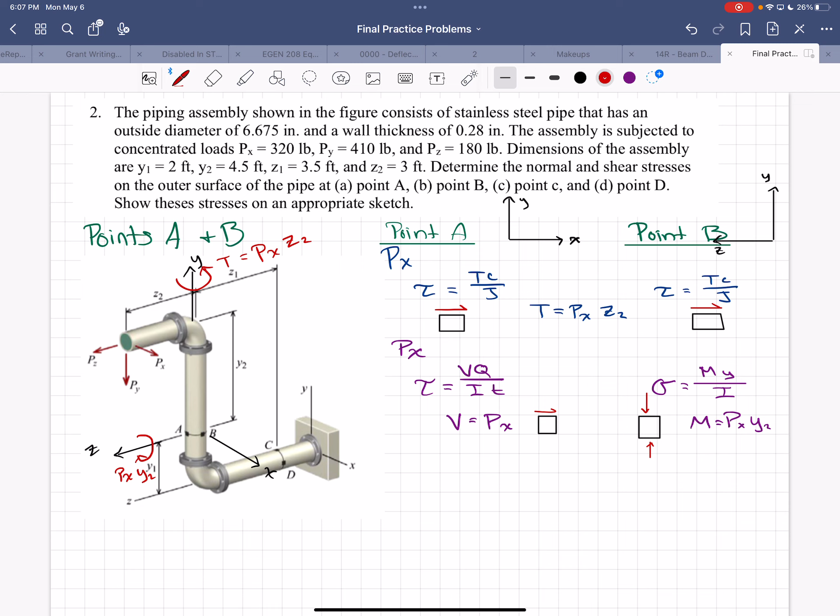All right, does PX do anything else at A and B? Does not. Okay, so then we move on to PY. It's a very arduous process.

PY, all right, what does PY do? Does a couple of things. At which one? A. Nice, said that with confidence. Compression or tension? Compression, right? So PY—oh yeah, I brought the dog bone.

Okay, PY, we slide it over, so it's going to pull on something up here, right? It's pulling this way, and it's bending. This is even worse room for—yeah. So that means, if we pull it this way, PY is going to bend this thing down, which is then going to bend this thing down, and A is going to be in compression.

Good job. Does everyone kind of see that? Okay, so what's the moment going to be? PY times what? PY times, yes, PY times Z2 is going to be what makes it bend that way.

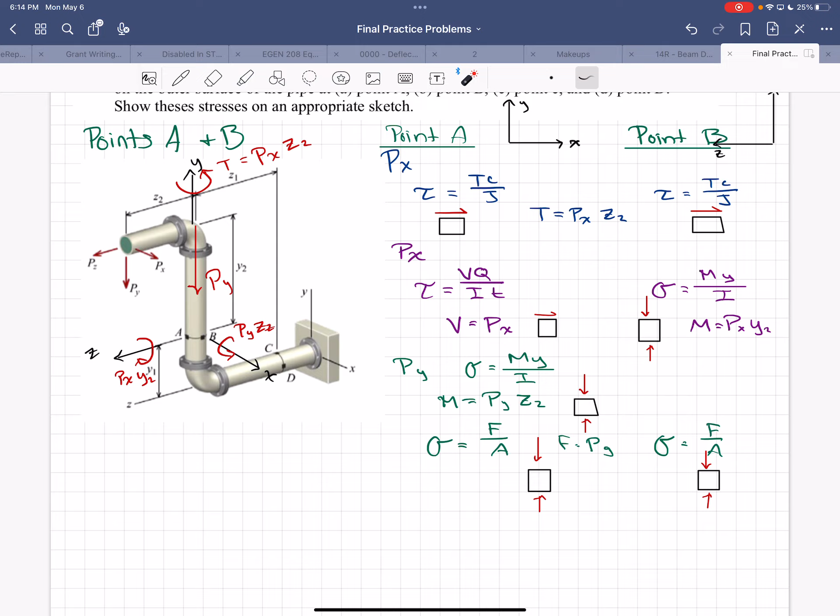All right, so does PY do anything else? No. So we can move on to PZ. Oh my goodness, all right. PZ, what color? We're gonna do bright blue. PZ, what does it do? At A and B.

Bending normal at A. So it's going to be a moment about X, and it's going to be PZ times what to get to A?

Y2, right? So we're cutting it here. We're going to take PZ times Y2, perpendicular distance, and we're going to get a moment around X. So that's going to be PZ times Y2.

Will that moment change if we move A or B up or down? It will. So what does that mean we're also going to have? What two go together, like up here? Shear and bending normal, right?

So if A is going to have sigma equals My over I, and the moment equals PZ times Y2, and it's a changing moment, then B, which is 90 degrees away, is going to have shear equals VQ over IT. Cool?

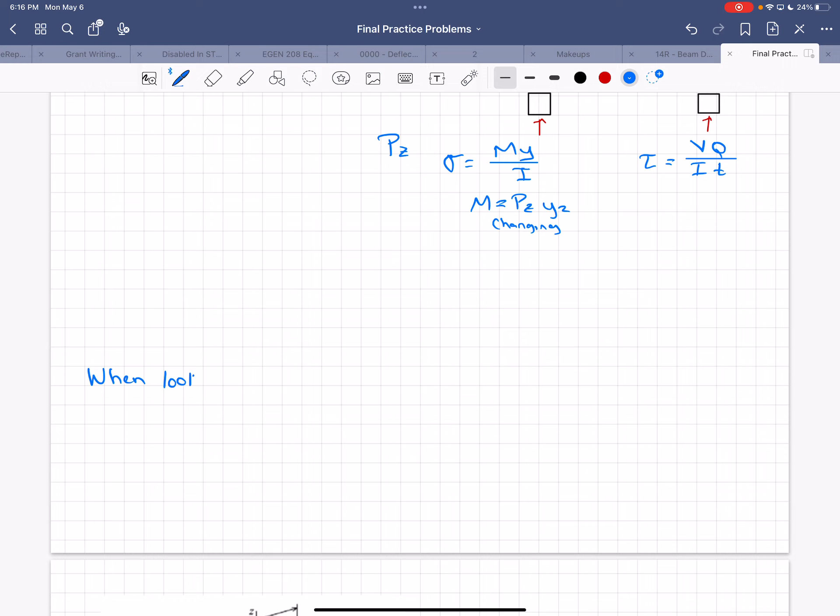So on your sheet, another thing worth noting is that when looking at one plane, that's what we're doing right now, like A and B, you would have sigma equals F over A, and shear equals TC over J is the same at both.

And then sigma equals My over I if M changes along the length. If you're looking at sigma A, then tau B equals VQ over IT exists.

And vice versa. This could be A and this could be B. Does that make sense? So those two things are related. But if sigma

is constant along the length, there's no tau equals VQ over IT with that force. Does that kind of make sense? It's words, I don't know, hopefully.

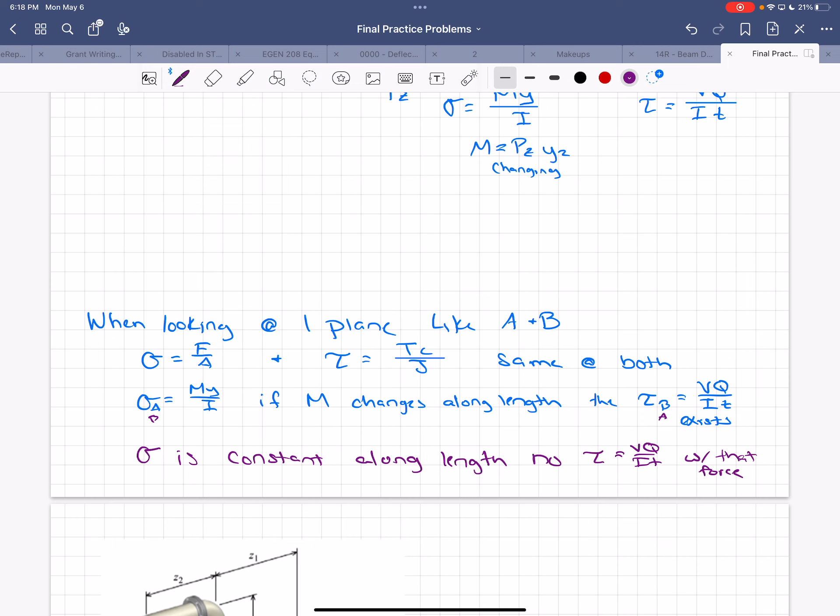All right, so M PZ times Y, it's changing. So then it's normal, we have a shear. Normal, it's in compression, always the longitudinal axis.

So that was at C or D, would it be? Yeah, so C and D, everything would be in the Z direction. Okay, and then shear, we would have PZ. So we have the Z-axis right there, it would be, move it down.

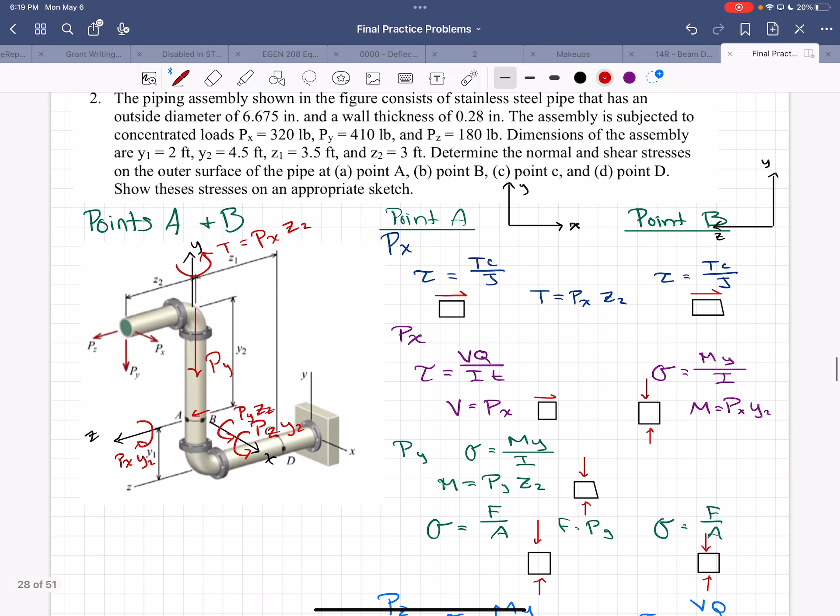Helpful? Okay, oh yeah, no that was good. Okay cool. All right, so yeah, so then we look, yeah, and it goes in the positive Z direction, so it goes to the left.

So the only way I know how to do it is to think about pulling on that pipe, right? So if you pull on the pipe where it is, it's gonna bend the end of that pipe down, which is then going to bend this vertical pipe this way. Does that kind of make sense?

The way I thought about it is if it's bending, that Z bends it this way, it becomes a smiley face, and that A point is right here, so that A point's in compression. So since it's a smiley face, the top is in compression, bottom's in tension. So A is in compression, that's why it's in the axial direction.

So it's like trying to picture what's gonna happen. Very good, yes, very good. It's good, it's good. Because it's just picturing how this will deform.

So I'm gonna make, so this, like if you're pulling on, which one were we talking, PZ? So it's gonna pull it out, right? Which is then going to pull it out here. And so then if we have a moment, it's going to bend it so that it bends out like that.

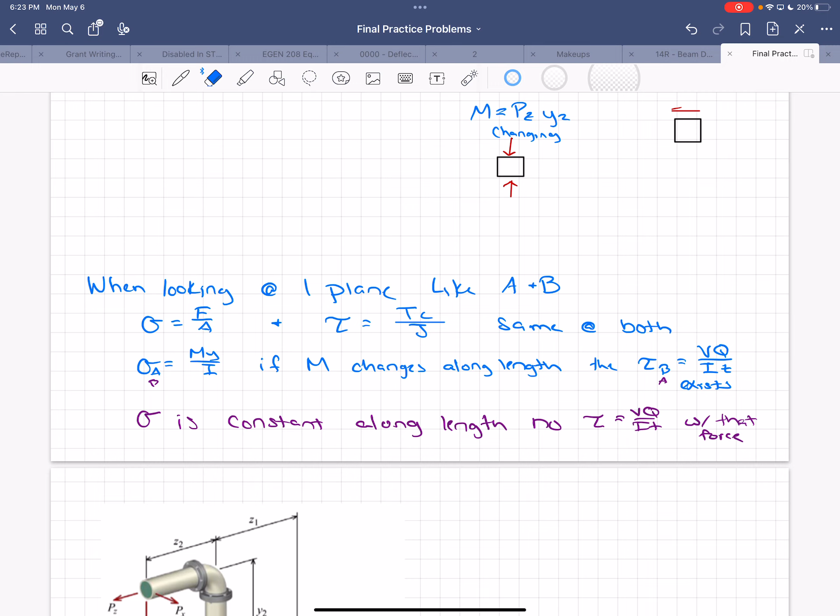Would V equal PZ? Would V for the PZ formulas equal PZ? I don't know the term. That's a good question. V equals the force we're using. Here, F equaled PY. And here V equaled PX because it came from PX. That's what I was asking about. I just wanted to clarify. Good question, very helpful.

Don't forget about pressure, you should bring that, the dog bone. Is that cheating? No, you can use the dog bone. I wish more people would try to use the dog bone, it helped you a lot. That's if I could just work with you all one-on-one. If I can have your deflection sheets back that would be great, or you can bring them, but it'd be better if I can have them.

Elijah, you said we get these both tomorrow or Wednesday? We get both, yeah. So close to an A. 92 is an A. Dude, just be grateful, man, be grateful that you passed.

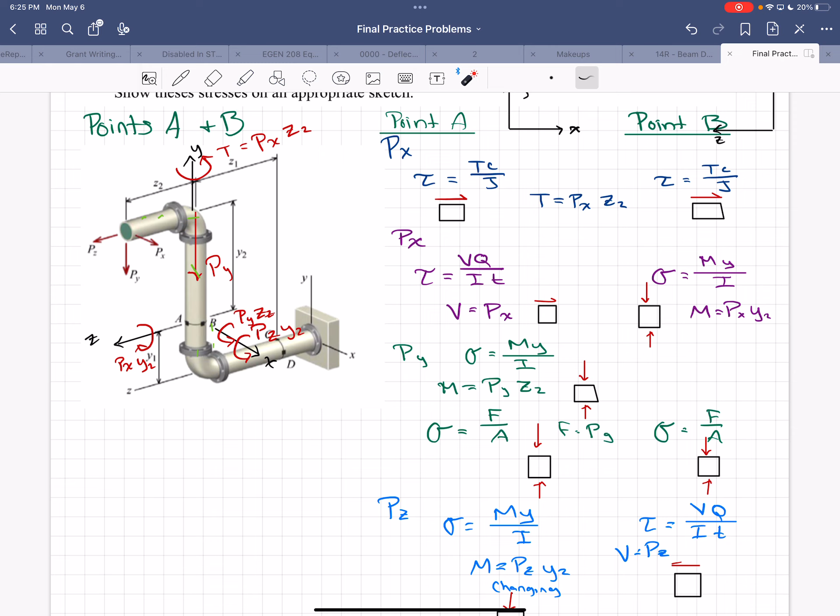Yeah, I guess. On homework 13, Andrew tried to explain it to me but he was kind of getting twisted around. How do you know, when you're doing problems like that, when you should use the hoop stress or the longitudinal? It's based on, like, when you're looking at a maximum stress. Remember, the hoop stress is the bigger of the two.

It's twice as big, so that's when it matters. If you're looking for a max limiting case, you look for the bigger one. So if it says find the maximum pressure, and this is your yield stress and this is your factor of safety, what would it say? If you're just using the longitudinal, it would be like calculate the longitudinal stress. And then remember how to do strain.

Remember, it's not just sigma over E, there's this equation, no problem. You have to use these equations for strain because it's 2D strain. Remember these? Yeah. I'll have to remember, look them over.

Are there more examples of those? I figured there aren't a lot of examples, but if you just kind of revisit, don't redo them all, but look at the examples and the homework. There's plenty of examples, I think, for you guys.